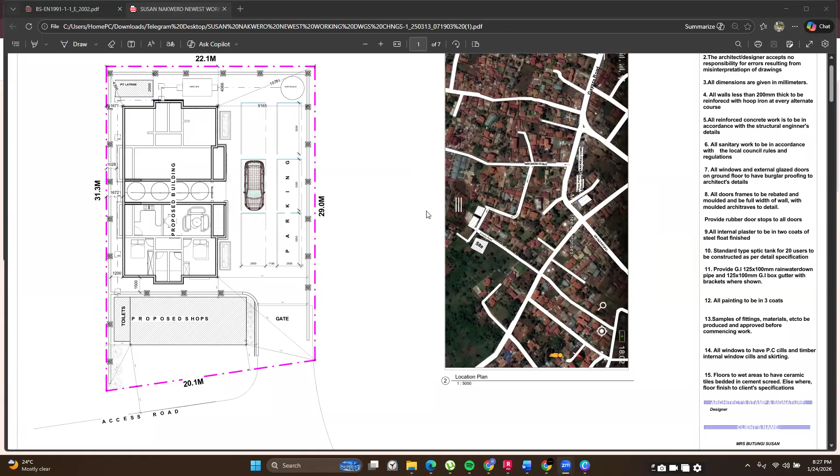I'll share my screen now. I hope I'm audible. Once my screen is visible, please type a one to let me know that I am audible and that you can see my presentation. I can see it is visible, and I hope I am also clearly audible. So this is what we have.

I'll start with what Boss Wataba raised. When you're modeling or placing your columns, you have to work with the entire architectural file hand in hand. The best way to do this is using CAD files, because you can overlay them in a software like Revit or AutoCAD. As you place your columns, you can tell whether they will collide with other architectural features or with the usage of the structure.

You want to avoid scenarios where a column goes through a room. Probably it's at a wall or beam intersection in the lower floors, but in the upper floors it passes through the center of a room. That's quite common, especially when working with maisonettes, which are fairly complicated. Normal residential buildings are usually simpler because their floor plans are typical and don't change much from floor to floor.

In the interest of time, I'll go directly into the software. We covered quite a bit yesterday, and we were able to model the first floor. We still need to model the staircase and then copy these elements to the other floors.

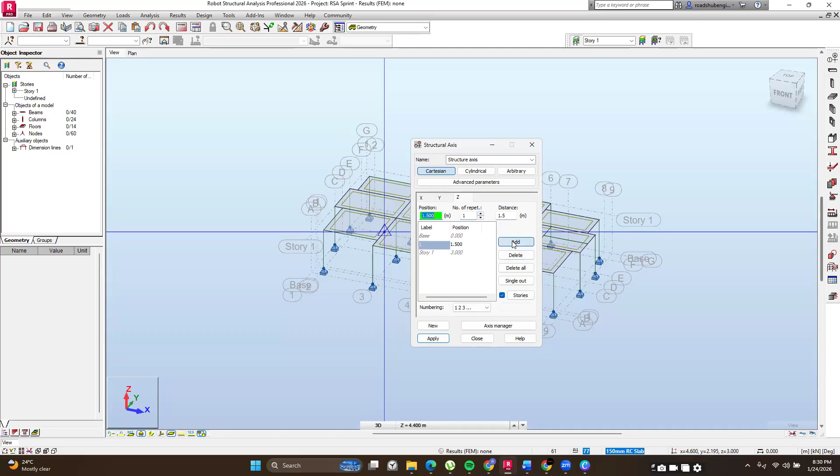At this point, you're going to add an intermediary story. We're going to have the position as 0, the number of repeats as 1. Since our story height is 3 meters, the position of our landing will be 1.5 meters, or just between the two floors. Then I'll click on add. Let me have number of repeats as 1, click on add, then apply. Once I do that, you're going to see that I have an intermediary story here.

So I want to place this staircase in this point here. I will use grid 1 to model my landing. Then I will add another grid in this direction between grid 4 and 5 so that I can have a separation for both of my runs - that is the run coming from the ground floor, and the run that is going to be moving from our landing to the second floor, or to the first floor.

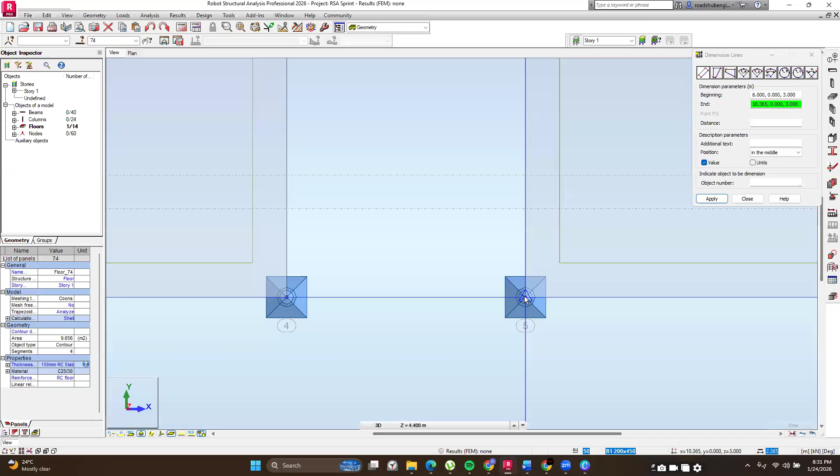So to do that, I will first measure this distance here so that I can see what you are working with. I'll go to tools. So to measure in Robot, this is what you do: you go to tools, then you click on dimension lines. Once you click on dimension lines, you just need to click between the 2 points that you want to measure and click outside.

So I have 2.365. Not sure what value I'll get once I divide this by 2. Let me do that quickly. 2.365 divided by 2 should equal something like almost 1.2 meters.

So I will just define a grid here. I will go to grid 4. And then since this is in the x-axis, I will click on grid 4 to make it my current position. So you click on it to make it the current position. Then once you click on it, you have the number of repeats as 1. And then I will enter the distance.

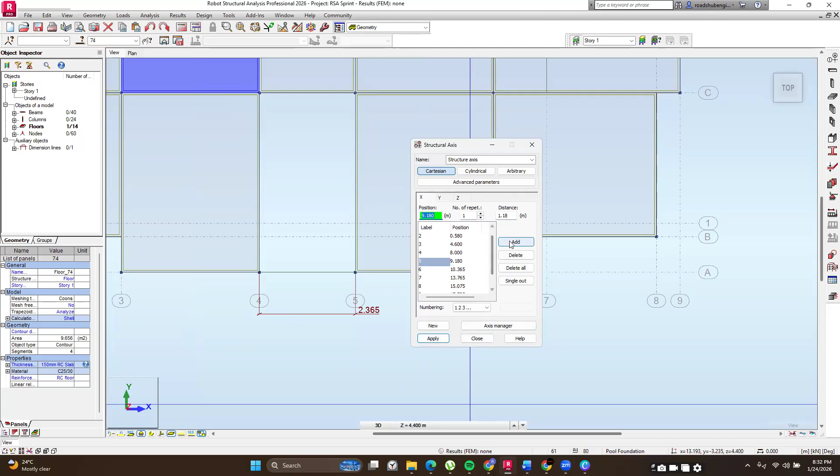1.18, that's what I got. Then once I have that, I'll just click on add. Okay, I'll click on add, then apply, and then close. Once I do that, you're going to notice that I have a new grid here. So by making this grid, it is going to make it easy for us to model our structure.

So we're going to get started with that. I'm just going to go to my plan view here. Then once I go to my plan view, I'm going to scroll down to my staircase level. Remember, my staircase level is 1.5 meters from story 1. So when I use this button here - this is the button we are using where you can see the XY, the story you're in, and then you have these 2 arrows here. The first arrow takes you to the upper floor, and the second arrow, pointing downwards, takes you to the lower floor.

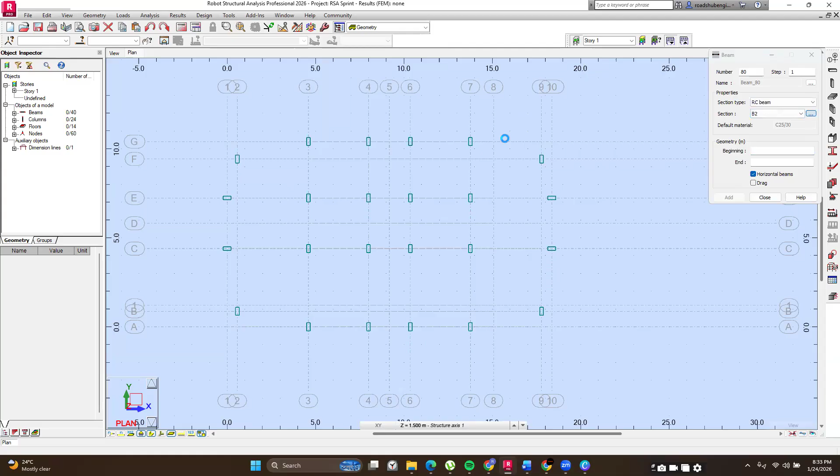So you'll just use the lower arrow to move to the lower floor, and then you are going to create a beam here. So I'm going to click on beam, and then I'm just going to define a new beam. I will define it as we did yesterday, and I will give this one a unique name, ST beam. The reason I'm doing this is so that I do not load it with my walling. The interest of having this beam is to just support our landing and not to support our walling. So I'll have it in such a manner so that when I come to load my structure, I do not need to load this one with the walls. I'll just have it here, then I'll click on add, then close. Then once I have that, I will place it between these 2 columns. That one is the beam that is going to be supporting our landing at this point.

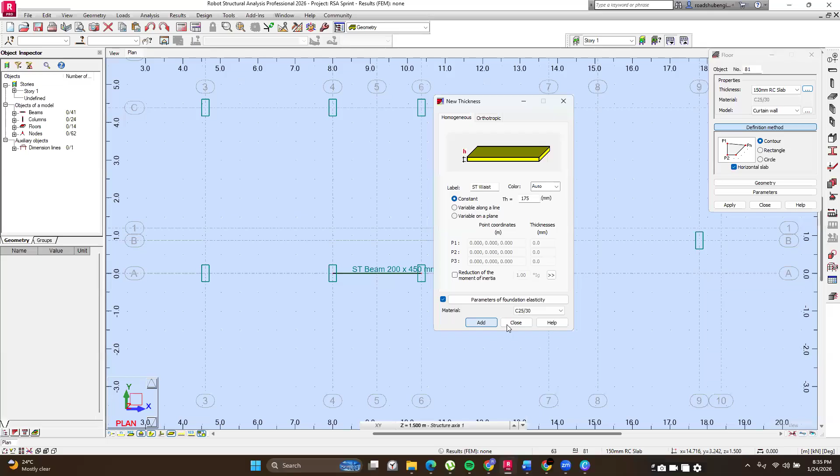Then after that, I will go to panels to define my floors. These are the risers, or just the flights for the staircase. So I'll go to floors here. Then once I come here, I will define a new thickness. I'll call it, say, the stair waist, just to be accurate. And then for the thickness, I will go with a thickness of 175 millimeters. The material I'm going to use, I'm going to stick with class C25/30. Then I'll click on add and close. Then to draw it, you just select rectangle and then you place it.

I hope you remember how you are placing them, staying consistent to the direction of modeling. You are working left to right, then bottom. You're going to see why we recommend you do that when we get to the analysis bit.

So this is going to be my landing. When you go to the 3D view, you can see where your landing is. So what we need to do now is model the risers.

Doing this is quite easy, and you can do it in any way you want. So I will start with the one coming from the first floor going to the landing, the one that is coming from the first floor going downwards.

So I'll just go to floors here. Then I will select my stair waist, ensure my model calculation method is shell. Then I will check rectangle. And because this slab is not horizontal, it is slanting in height.

Remember, it is moving from story 1 to the landing level, so I have to uncheck this horizontal slab. Once I do this, I will click here, then click on this other support. Then instead of clicking at this point, I will just click on the drop down here and click here.

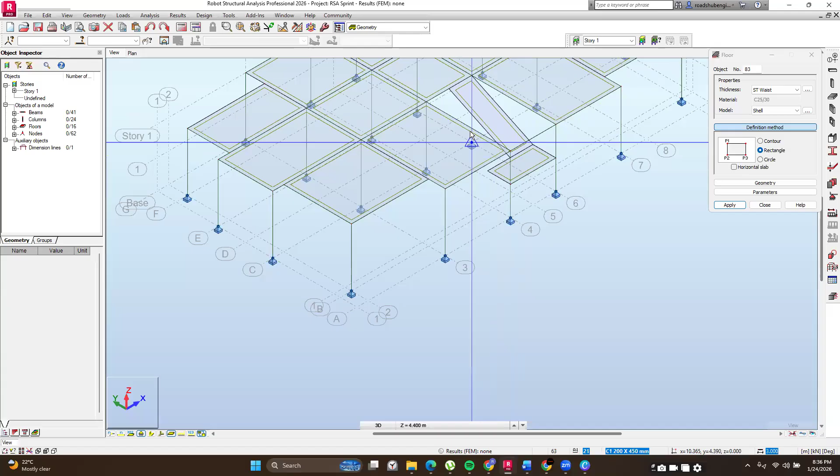Once you do that, if you go to your 3D view, you can see your first landing there. So it's that easy to model in Robot.

So I'll do the final one. I'll go to rectangle, have this one here, then move up to this level here and have my other landing there. So you can see I have my staircase ready.

Once you have your staircase ready, now you can begin to replicate this model upwards. Replicating this model upward is quite easy. We said we have 3 stories, so all we need to do is copy this story twice upwards.

Copying it is quite simple because all you have to do is go to the object inspector on the left. So to copy this structure upwards, you go to the object inspector on the left, and you're going to right click on the story parameter there.

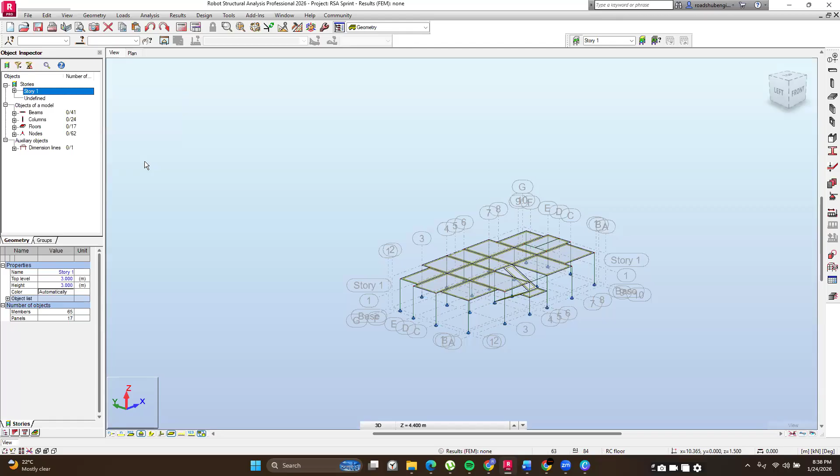I hope you can follow my cursor. I'm moving with my cursor to the left, and just here under Object Inspector, we have stories. Then I'm going to right click on story, and once I right click on story, I'm going to copy story. So you just right click on story, place your cursor on stories, then go to copy story. Once you click on copy story, this pop-up is going to appear.

What this pop-up is prompting you to do is just define the settings by which you want to copy your structure or elements. So I want to copy them going upwards, so I will ensure geometry is at the top.

Then the floor height is 3 meters, and then I will define the number. So I want 2 copies. I'll just click on 2, and then I will click on OK.

So when it comes to creating these copies, if they are just a small number, say 2 or 3, you can do it all together as I have done. But if you are working on a larger story, say you want to create 5 copies, I'd recommend you do them 1 by 1 or in sets of 2, so that you do not overwhelm your software.

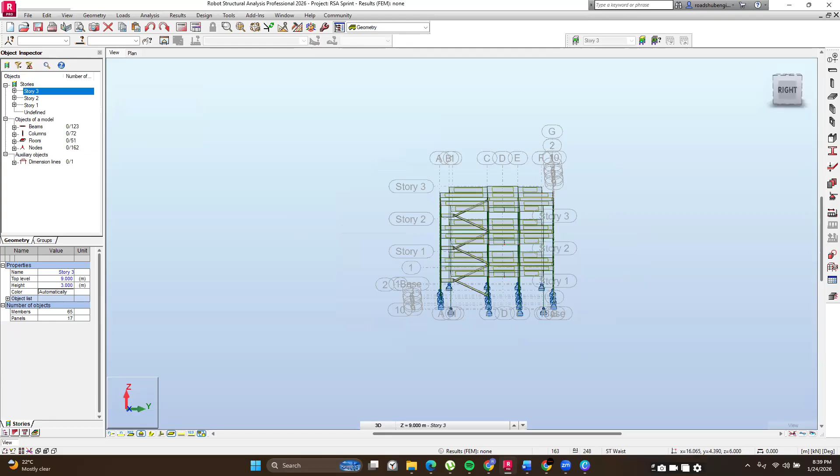Then I will uncheck this filter story axis so that you can see our structure. All right, and that is what we have. That's how you can visualize your structure within Robot, and you can see modeling it was quite easy.

If you remember the design process we had yesterday, we stated that after you've done your conceptual design, or come up with a preliminary sizing of the members, this is where we are at. We have made educated guesses on the positioning of columns, their orientation, and their sizes. So in the next stage, we need to load the structure, load the elements.

And then after we load the elements, we are going to do our manual combinations, and then we are going to run an analysis. After running the analysis, we will be able to understand how these loads are going to affect our structure in real life. What are the shear forces that are going to arise due to our loading?

What are the bending moments? What are the axial loads? Once we have those results from the analysis, we are going to be able to design the structure or the elements in a more detailed manner and get the required cross-sectional areas and also quantities of reinforcement.

So at this point, we want to load our structure. When it comes to loading the structure, we have the typical loads that you expect your structure to be exposed to, depending on where it is. The most common ones are the dead loads, live loads, construction loads, wind loads, earthquake loads, snow loads, and soil loads. Loads are hugely affected by where your structure is located.

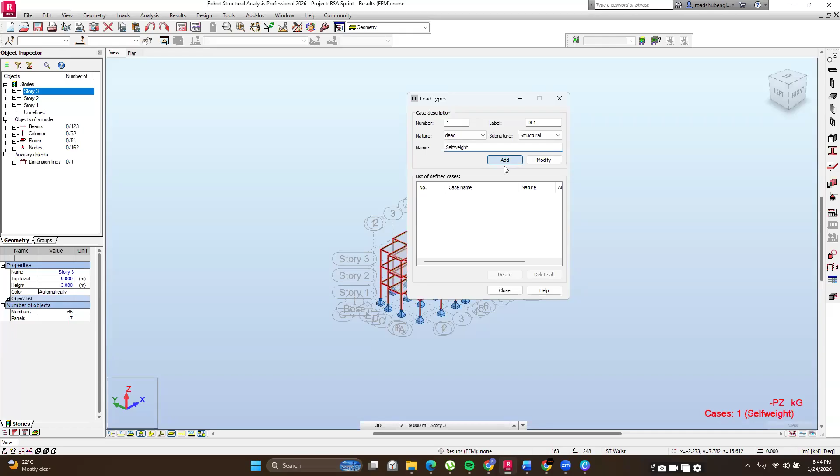So it's just good practice to assign this as the self-weight, and then click on Add. You can see once I did that, my structure became highlighted in red, just to show you that the self-weights of these elements have been accounted for. Then you're going to have loads that you expect our structure to be exposed to. So we have the wall loads — these are just dead loads that are going to be arising from the weight of the walls.

Then we have floor finishes. And then I think from there I could move to live loads. So I'll change this to live, and then I will just have two live loads: floor live loads and stair live loads. Just that. Then once I add them, I'll click on close.

So at this point, we've told the software the type of loads that we expect. The next thing we need to do is to tell the software what are their magnitudes, what is the nature of the force, or how large or small is the force coming from these loads.

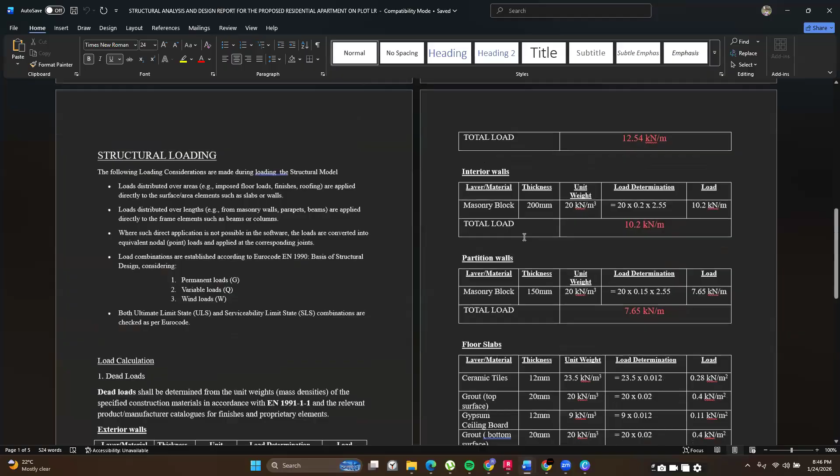So when it comes to loading the structure, I always recommend you decompose the loads manually so that you can be able to understand the loads better. The beauty of doing this manually is you can create a template like the one we have, a template for your loads so that you can keep reusing them. You do not need to keep calculating them every time you have a new structure, especially if they fall under the same category.

So for the dead loads, I prefer if you decompose them manually, and then for the live loads, we are always going to refer to the Eurocode, Eurocode 1, for the live loads. All right, so let's get started. I'll just make this quick so that you can save on time.

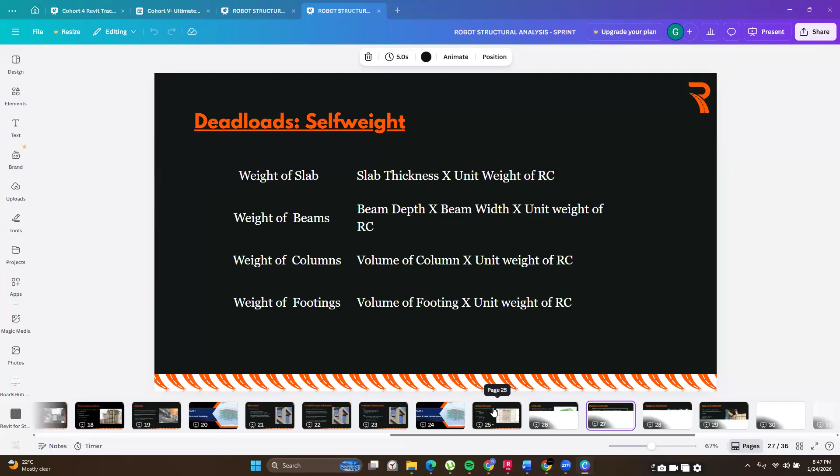Okay, so we have basic dead loads here, and this is just a way of calculating some of the loads that you expect to have. So for example, for the wall loads, you could easily calculate them by multiplying the unit weight of the material, that is the density of the material, say of the blocks or clay pots you're using as your walling material, then multiplying it by the wall thickness and the wall height. If you do that, you get a load in kilonewtons per meter. Remember, the wall loads are going to be acting on the beam, or they are majorly going to be acting on the beam, so we expect them to be in kilonewtons per meter.

So let's define this one. To define it in the software, you do this. The first thing you have to do is change the case here. I hope you can see where I'm moving with my cursor. Click on this dropdown and change the case here to wall loads. Then once you change the case to wall loads, you just go to loads and then load definition. Then once you are at load definition, now you define the load. These are the types of load definitions we can do: we can do nodes, we can do members, and we can do surfaces.

Nodes are basically point loads, members are majorly line loads, and surfaces are loads acting on your panels or slabs, which are usually area loads. Since the wall load is a line load acting on our beams, we are going to select uniform load here. So you have various types of loads you can add on your beams: uniform loads, uniformly varying loads, uniform moments, points and moments at given points. To keep this simple, we are going to go with the uniform load.

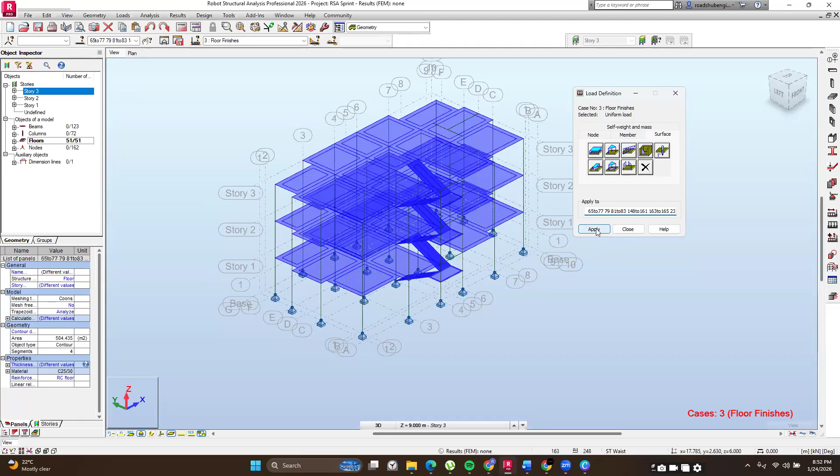So for this, I'll go with negative 1.75 and then click on add. Then I will select my floors — just right click here on the floors, select all of them, then copy and paste them here. Once you do that, click on apply and close. Then you have those loads added.

So you have all the dead loads added: your self weight, your wall loads, and your floor finishes. With that, we have all the dead loads that we expect our structure to be exposed to.

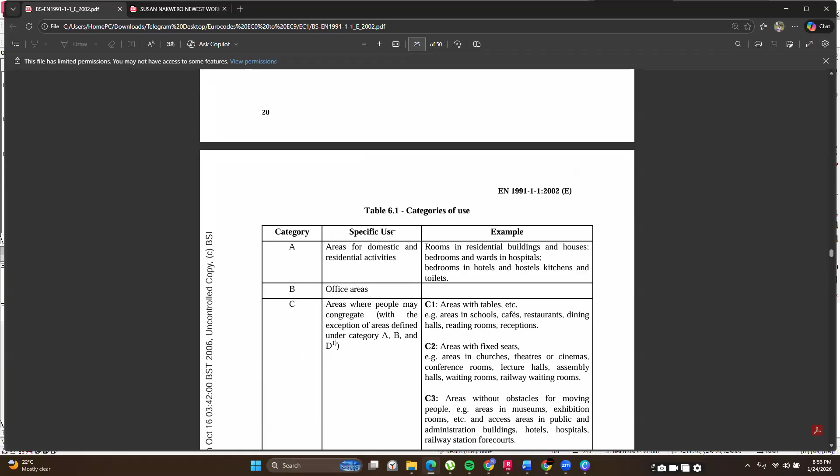The next thing I would want to define are the live loads. Values for the live loads we majorly obtain from Eurocode 1991 Part 1. For you to read these loads, you need first to go through table 6.1 so that you can understand the category under which your structure is. You can see they are categorized from category A to category D: areas for domestic activities, office areas, areas where people may congregate, and shopping areas. Depending on the type or use of the structure, you are going to have varying loads — the more people you expect your structure to serve, the more loads you have to account for.

Ours is a residential house building, so we expect it to be under category A. For category A, for the floors, we expect loads of 1.5 to 2 kilonewtons per meter squared. For the staircase, we have 2 to 4 kilonewtons per meter squared, and for the balconies, 2.5 to 4 kilonewtons per meter squared. So we are going to load these differently — we're going to do our floors first, then our stairs.

So we are going to go into Robot, and once we go in, we are going to select our floors and leave out the staircase. To do that, you have to go into the object, to the member selection here. Just follow my cursor — I'm hovering it around or over my structure, then moving it to the member selection over here. You left click on member selection, and once you do this, you're going to have these tools to select specific members.

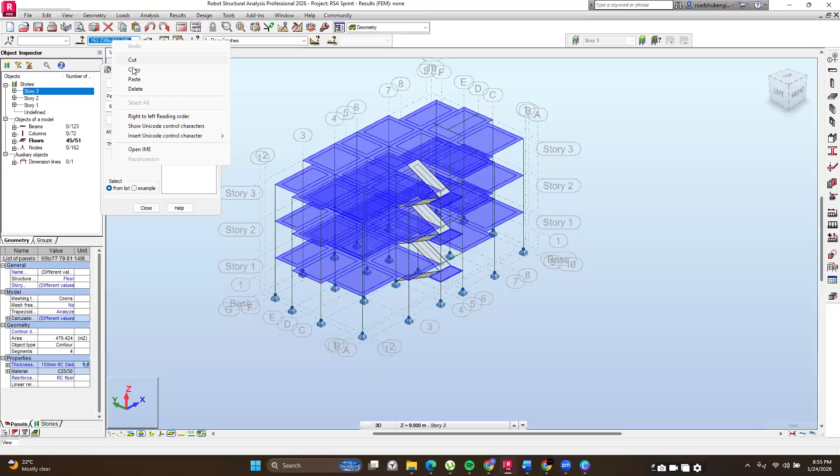I'll then copy these numbers. Then I will change my case to floor live loads, go to loads, then load definition. Since this is a surface load, I'll click on surface, then select surface load. We saw the area load for floors should range between 2 kilonewtons to, once again, 1.5 to 2. So there's no harm in going with a negative 1.75 for that. I'll click on add, then apply, and I will have my floor live loads added.

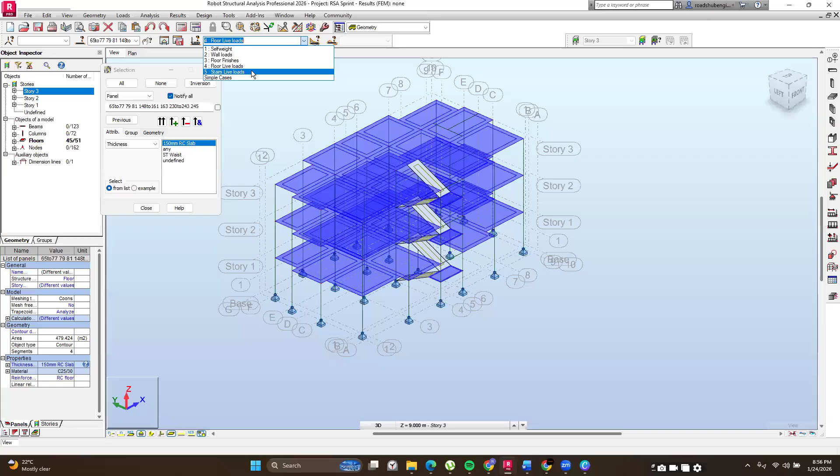Then I'll click on none here so that I unselect those floors. Once I have that, I'll close this and then change the case to stairs live loads.

After I change the loads to stairs live loads, I'll go to loads, then load definition. Once I'm here, I'll go to surface and select the surface. By looking at the code, you can see the imposed loads for staircase should be around 2 to 4 kilonewtons, so I'm just going to go with 2.5.

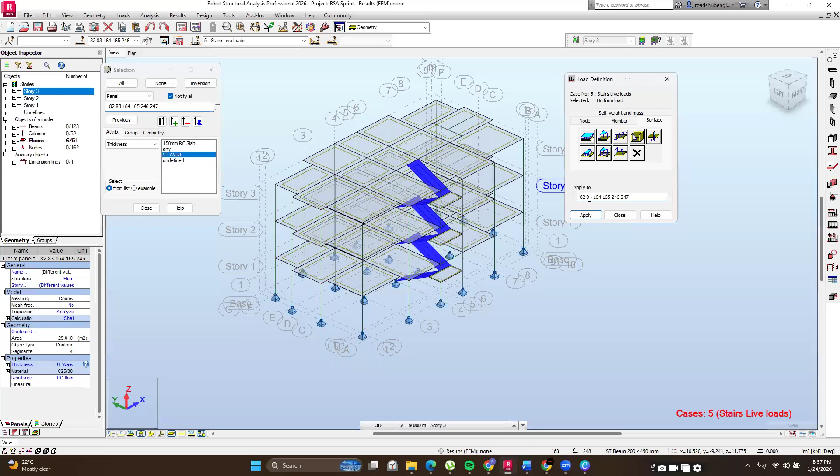I'll go with negative 2.5, and then click on add. I'll click on add, and then once I come here, I'll just delete these. Then I will select my staircase here, I'll just select my stair waist. Once I select them, I will paste it. Once you do that, you click on apply and close. By doing that, you can see that you have easily just applied loads to your staircase.

Then after you've applied loads to your staircase, you need to create the combinations. Remember what I told you about Robot? It is organized in a very beautiful way, because it literally guides you on what you want to do. So you finished your geometry, then you've done your loads. The software is telling you that you need to do your load types first, then your load definitions, and then you can do your combinations.

You can do your combinations in one of two ways, either manual or automatic. With manual combinations, you get to tell the software how you want your loads to be combined. With automatic combinations, you just let the software combine them for you. I always recommend you go with manual combination so that you can be in control. Once you click on manual combination, you get this prompt, which allows you to select the type of combination that you want or need.

You have ULS and SLS majorly, so I'm going to be doing the ultimate limit state combination and the serviceability limit state combination for today. For the ULS, I'm just going to give it a name, ULS combination, and click OK. Then I just need to select all my loads and move them to this side. You click on these three dots, on this arrow, move them to the right, and the software is going to assign the correct factor.

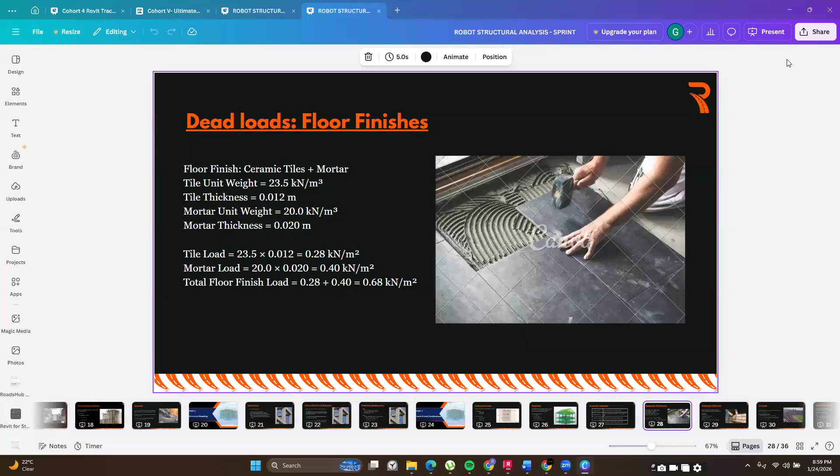Remember what we said yesterday: when it comes to loading your structure, you expect some uncertainties in the design. Sometimes you have to account for scenarios where certain loads are going to be exceeded from time to time. There are times the live loads may exceed what you actually designed for, or the masonry blocks used to construct your wall may be heavier than you intended them to be. For that particular case, you have to multiply them with a factor of safety so that you can account for those deviations.

This factor of safety is provided in the code. If you are familiar with the Euro code, you know the factor 1.35 for the dead loads or permanent characteristic loads, and then 1.5 for the QK or live loads. So we have that, and you can see that the factors are applied automatically depending on the type of combination you selected.

So I'll click on Apply to apply that. Then we are going to click on New to create a new combination. This time you are interested in creating an SLS, or serviceability limit state, combination. I'll select SLS, and in the combination name, for ease of reference, I'll call it SLS combination. Then I'll click on OK.

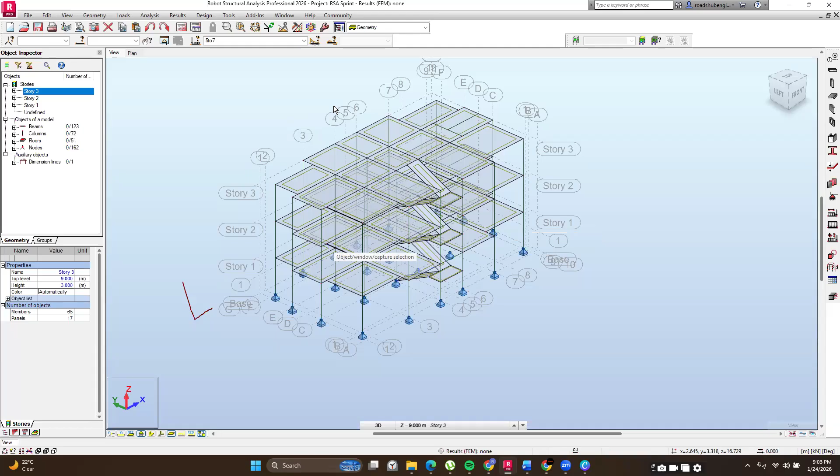So to ensure you get the design right with Robot, you have to mesh correctly. The first step, this is what we do: go to Tools, then Job Preferences. This is the first step I will always recommend. Go to Tools first, then Job Preferences, click on Meshing, and where you have Panels, change this to User. The reason I'm changing it to User is so I can have more control over the software. I do not want it controlling my machine or controlling everything in the background. I want to define my own parameters, so I'll always go with User.

Once you go with User, click on these 3 dots, have them as complex mesh generation, then go to method parameters and uncheck regular mesh. These are just some of the tips you use when working with Robot, just to be in more control of how the software designs. Once you have this, just click OK and OK, and that is the first step.

Then the second step is in setting the mesh to happen, or to occur. To create the mesh, or to break down our structure into mesh elements, this is what we do: we go to this option here, called the options of finite mesh generation.

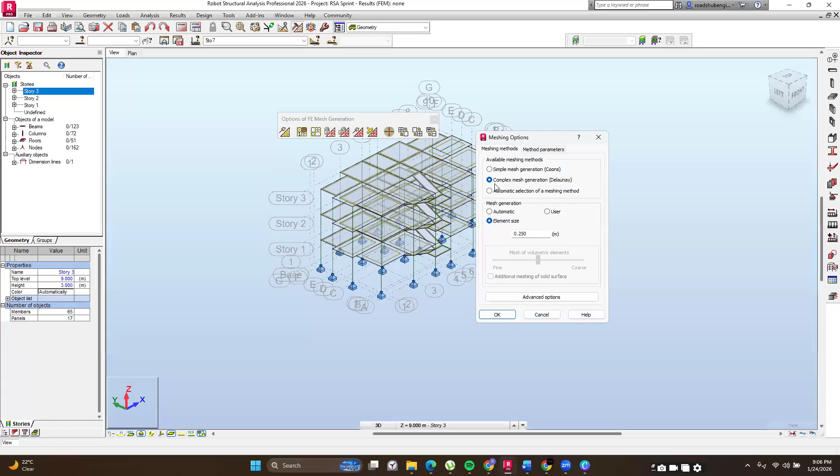Once you have them as shell, go to options of finite mesh generation again, then go to meshing options and apply this for all elements. Once you do this, set it correctly. We had done this before in the tools, so I'm just confirming everything is as I had set it. Once we're good, click OK, and we're good to go.

Once you have that, now you can generate the calculation model so that we can do our analysis. You want to do your generation, just ensure everything is okay. Once you do that, you'll notice the software breaks down everything into small elements. You can see our slab has been broken down.

If you can see how our slab has been broken down, please type a 1. Super, I can see we are together, so we are going to proceed.

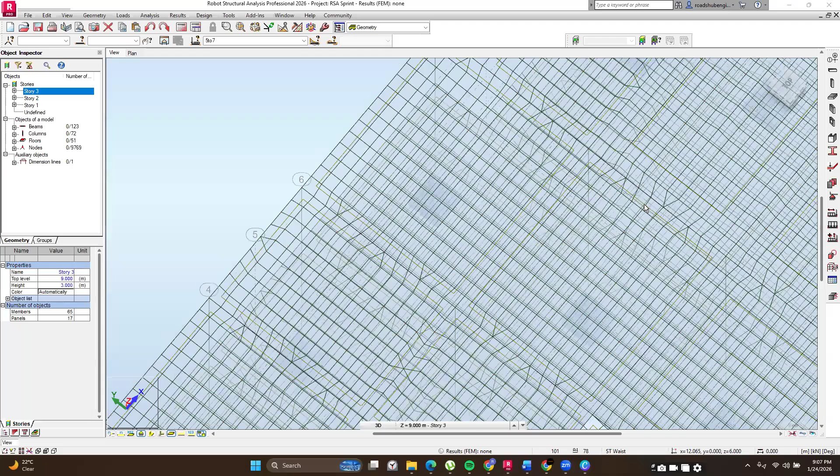Once you have this calculation model, now you can do your analysis, and analysis is quite easy, especially for smaller structures. To run this is simple: you just click on calculations here, and let the calculations run. Once the calculations have run, you'll notice that the results are now available.

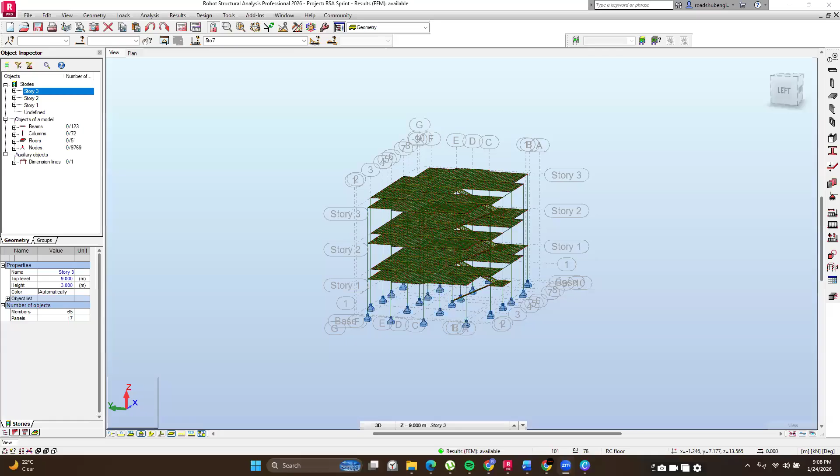Previously the results were not available, but at this point they are available now. So it means we can now understand how the various loads we applied earlier are affecting our structure. We can see the bending moments, the shear force, the axial loads, and everything else, and read them from here. I want us to get to understand the type of forces that have arisen due to the loadings we applied.

But before we do that, let me open something here. I think this one is important to have. Let me see, we'll expand this slowly. Okay, so I have that. Let me take you through how you read the results.

When it comes to reading results in Robot, it's quite easy. We have tools in the software that allow us to read the results, located in the results tab, and you can see we have many options. As I proceed, I hope you're appreciating how the software has been organized—it's really easy to follow. You have your geometry, then your loads, your analysis, then your results, then your design. It's arranged to lead you on.

So we have our results. For you to view your results, you have various options: diagram for members, maps on members, maps, and panel cuts, plus other options as tables. For today, we're going to focus on diagram for members and also maps. We'll use diagram for members for our framing system, that is our beams and columns, and we'll use the maps for our slab.

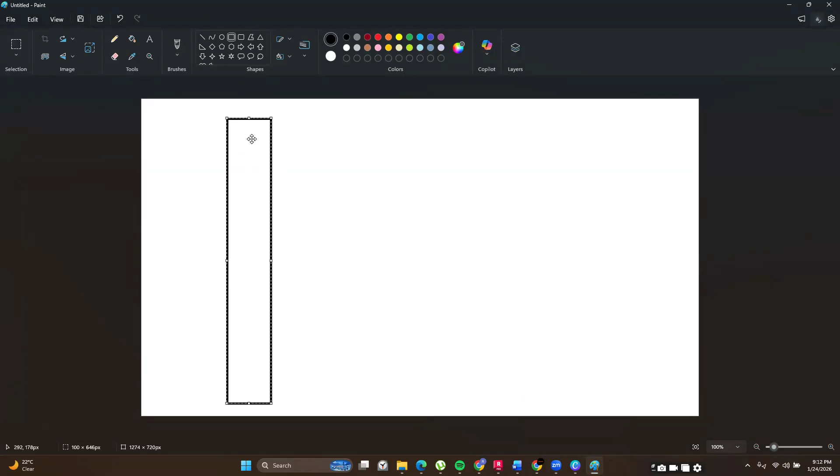Okay, so this is how Robot works. If you are looking at a member, be it a column—let's assume this is a column, or this is the longer section of a beam—this axis that is cutting through this longitudinal section is the x-axis.

This is the local axis for the members. If this is the local axis, it means that if a force is acting in this direction, then it's an axial load. Then we have the cross section right here. Let's assume this is the longitudinal section, and this is a cross section.

So you have these axes. We said for these members, you have the major axis going in this direction, and the minor axis going in this direction. This axis in Robot, the major axis or the axis along the deeper section, is always Z. This is the local axis system for Robot. So you have this axis as Z, and this axis as Y.

Once you understand that, it becomes easier to understand these results. If you do not understand this, you may not be able to understand what the software is communicating with you. So just to reiterate, this is the x-axis, this is the z, and this is the y.

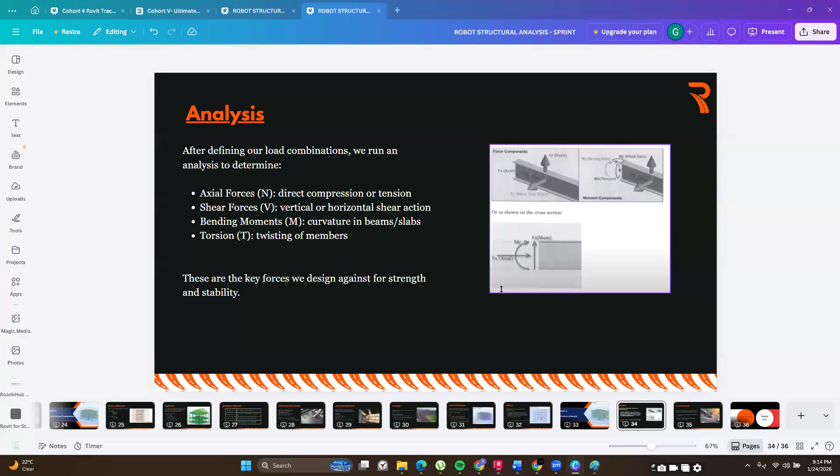From this, you can tell if this is the beam, the Fz is going to be your shear forces, and that is what you look at when designing for stirrups or placing your stirrups. And if the forces are in this direction, then you expect them to cause a bit of torsion on your member. That's mentioned, or provided, on some of the Autodesk forums.

That's what I always recommend when you're using a software—just make it a habit. Go through their forums, get to understand what they are saying over there. You get to learn a lot on how to use the software.

So you can see the Fx is the axial force, the Fz is the shear, and the Fy is the shear in the weaker axis. You can also see it in this diagram here.

Now that we understand that, we can portray and show some of the results. I'll start with the FX, which is particularly important when designing your columns, because for columns you're going to be designing for the axial loads and the moments. So I'm going to show my FX here.

Once I show my FX, I'm going to go to my parameters. Parameters, we said, affect how the results are viewed. So I want to show labels so that they are a bit clear, and I want to show the positive and negative values as differentiated, and have my graphs filled. So once I click on apply, you can see what happens.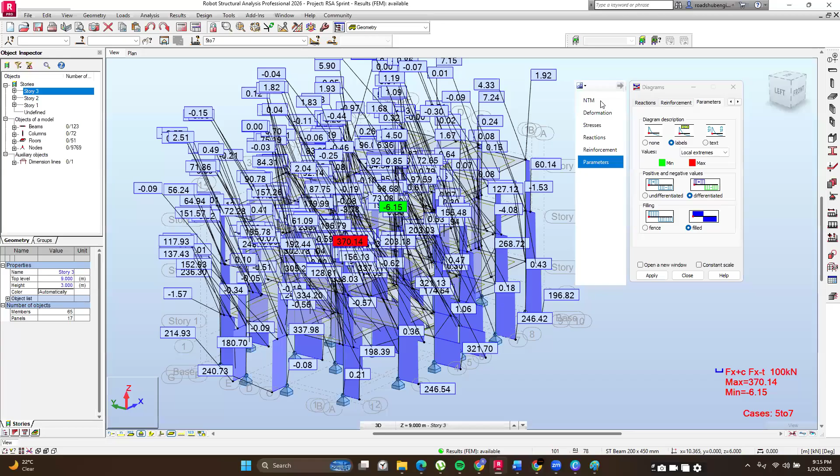So when you have this, it becomes a bit difficult to read, right? It is a bit difficult to understand what is going on in the background.

So to make this process a bit decluttered and easier to read and digest, I always recommend you filter them out.

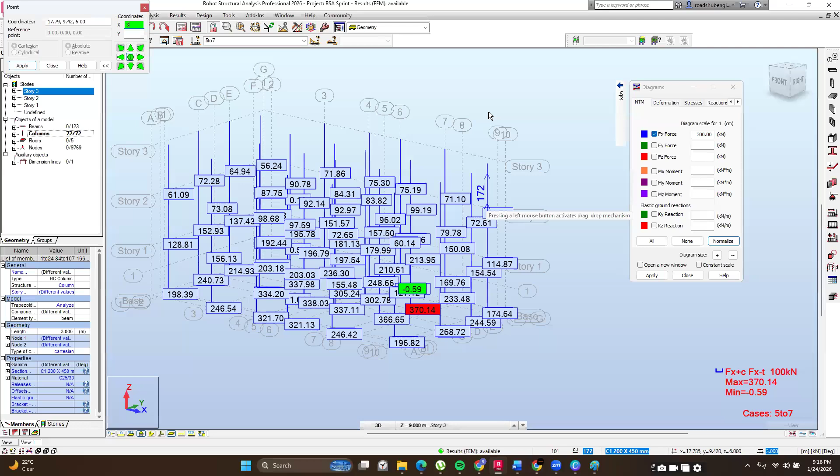If you want to analyze your columns or just understand how they are behaving, go to the object inspector, right click to select all your columns. Once all your columns are selected, click on Edit in New Window. Once you click on this, you're going to see your columns only. To make this a bit smaller or more detailed, just zoom in and click on Normalize, and then you can make more sense of them.

So you have that. You can see in this view they are a bit decluttered. So what you want to look at this point is how these forces are behaving.

So we said Fx is the axial force. And when you're looking at a column, you expect that the axial force or the load it is carrying to cumulatively increase as it goes downwards. So you expect every column to have the minimum loads at the top, and the maximum axial forces at the bottom. And these forces at the bottom are the ones you're going to use to design your foundations.

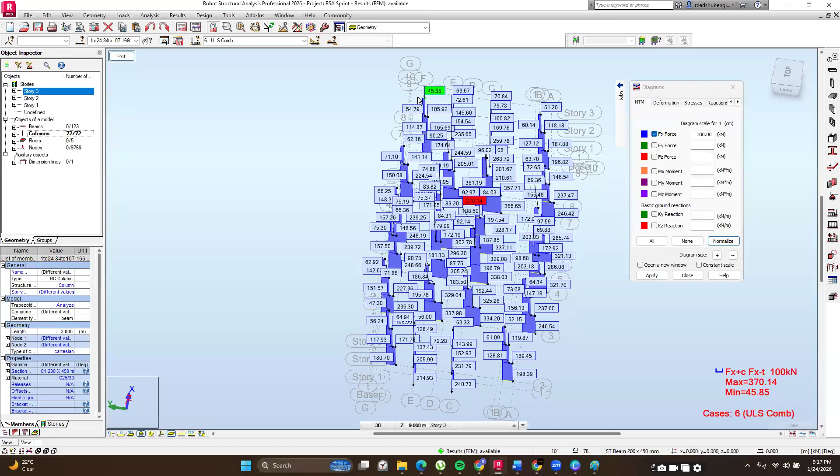I'll just turn this to the ULS combination so you can see this. You can see that the maximum load we have is 370 kilonewtons on the axial loads. To know your maximum load, it's always highlighted in red. So this is the maximum load our columns are facing. And then the minimum one, or the smallest, is the 45.85 you can see here.

You can use this to understand and judge if your modeling is correct. So if you look at this, you find that for this column, the axial load at the bottom is smaller than the one at this second story level. Then you need to ask yourself, what is happening? Why is that happening? Because it does not make sense. That should not be the case.

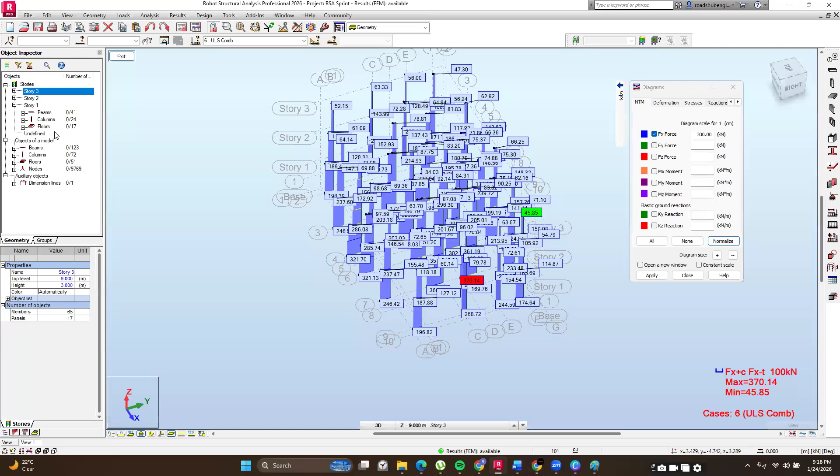And the beauty of this is you can filter out as many elements as you want. Say you're just interested in the ground floor columns, since you know the most critical columns are in the ground floor. So if you want to look at them, expand your story one, then select the columns in story one alone, and click on Edit in New Window to view those parameters.

And then you can zoom in and click on Normalize to make them a bit smaller, or you can just click Shift and Page Down on your keyboard to make them easier to read. And you'll be able to view your results better, so you can judge them on your own.

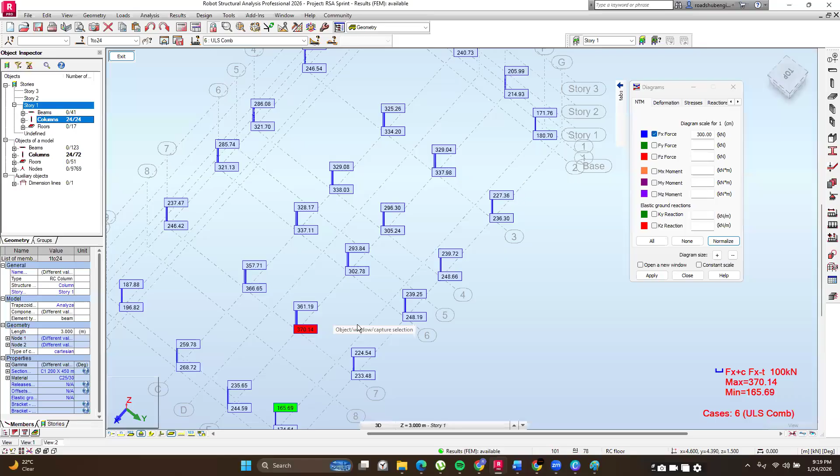Something you're going to notice is that the interior columns usually experience more axial loads than the ones on the outer sides. You can see the ones on the edges of the structure have axial loads in the ranges of 250 going downwards, while all the ones on the inner part of the structure are above 300 kilonewtons, which is something you'd expect.

Then you may want to look at the moments, MY and MZ, and you'll realize that most of the outer columns experience more bending compared to the columns within the structure. The reason is simple: they support beams on one end and not on the other end. If you remember the Hardy Cross method of distributing moments, you have a few elements you're distributing moments for, and in a realistic way there's no element on the left side trying to counter out the moments. So this is something you would want to look out for.

So you'd expect the columns on the outer edges to experience more bending compared to the moment of the columns on the inside part of the structure. And then you need to understand what these forces are.

So we said Fx is the axial load, and then Fy and Fz are shears. One is more along the major axis, and then Fz is along the other axis. And then Mx is the torsional moment.

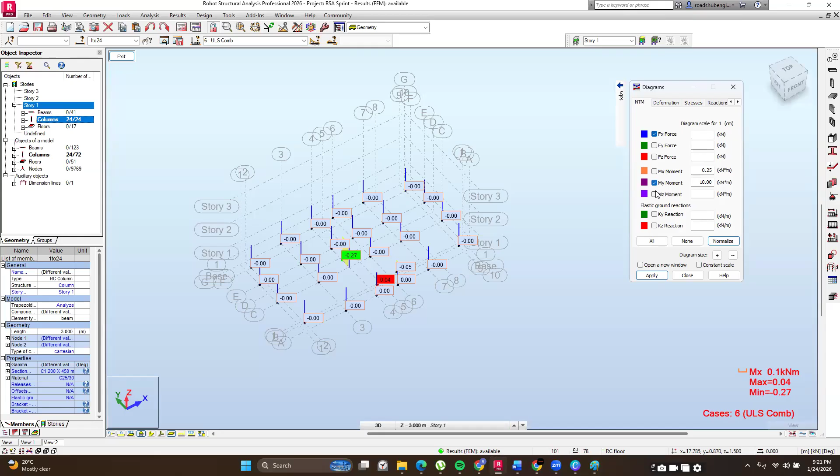Mx is the torsional moment. So if you have this axis here and your structure is being rotated along this axis, then that is torsion because it is causing some twisting to your element. And then you have My and Mz, which are bending along the major axis and the minor axis.

So this is how you can easily view and understand your results, just to get a good understanding of this. All right, so I'll show you something else.

You may want to see the shear forces on the beams. To do that, it's quite simple. I hope you can follow my cursor - look at where I'm hovering. Let me see if you're still following. I kind of lost my zoom thingy here.

Okay, so we have this structure here. Follow where I'm hovering with my cursor. At the bottom, we have this 3D option, and it is affecting this view - it is showing us a 3D view of our structure.

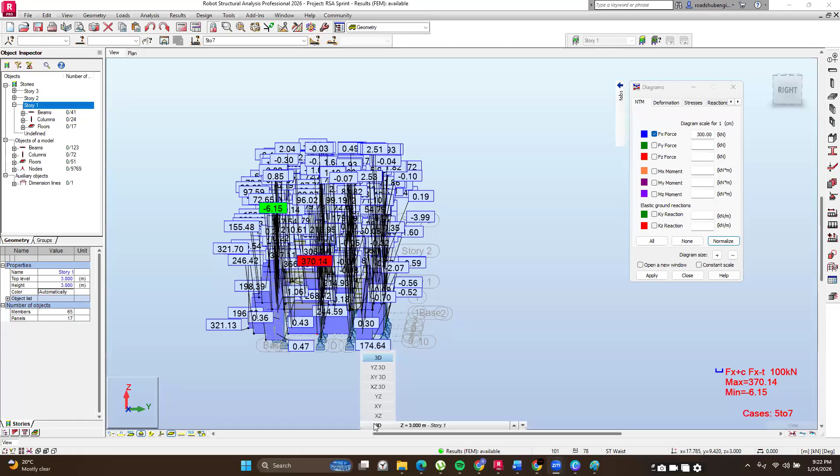So if you wanted to see the frames, you can work with XZ and YZ. For example, if I went with YZ, you can be able to see how the moments are distributed within the beams and the columns.

So let me turn this to FZ so that you can make more sense of it. So these are your beams and these are your columns.

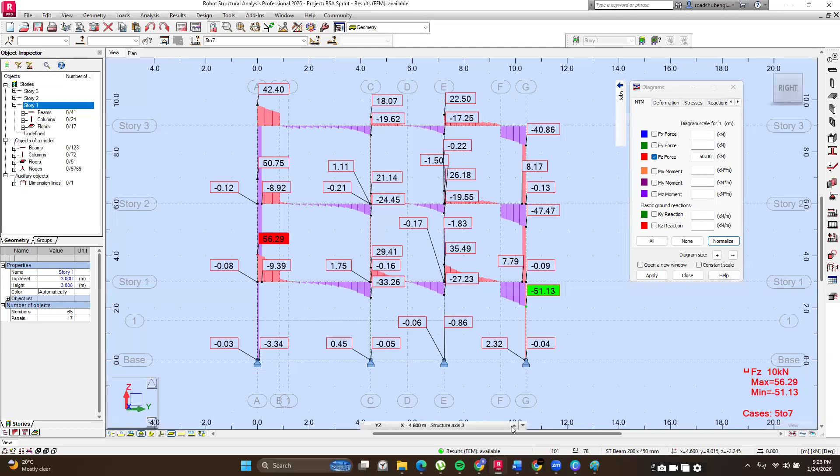For the shear forces, you expect your shear force to be maximum near the supports, and almost zero towards the midpoint of your structure or of your members, and that is basically what you are seeing here. So that's how easy it is to view results for members and just make sense of them. I always advise you go through them, ensure they are behaving in a manner that you expect.

All right, and that's how easy it is to do. Then the other thing I would want to show you is the other method of viewing the results, and this one is basically for the floors.

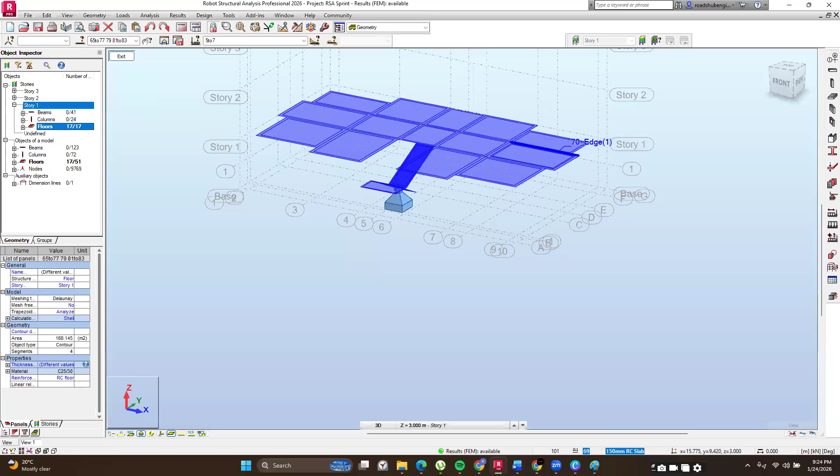So you may want to see how the forces, the bending moments, are carrying or distributed along your floor. To do that, you need to go to results, and then select maps. Once you select maps, it looks quite the same to what we had earlier, so you just need to select what you want to see.

So I'll bring you back to something I explained yesterday, what I was advocating for. During modeling, I was advocating that you stay consistent with the direction along which you model your slabs. If you choose to go from left to right, stick with that, because the direction you start modeling with becomes your x-axis, and then the second one becomes your y-axis. So if you start from left to right, this becomes x and then this becomes y.

So it is always better if you stay consistent, because all your panels will have the local axis in the same direction. It becomes a bit hectic when you have this x-axis in this direction, and then when you came to this panel, your x-axis is in...

Do I know how to use this?

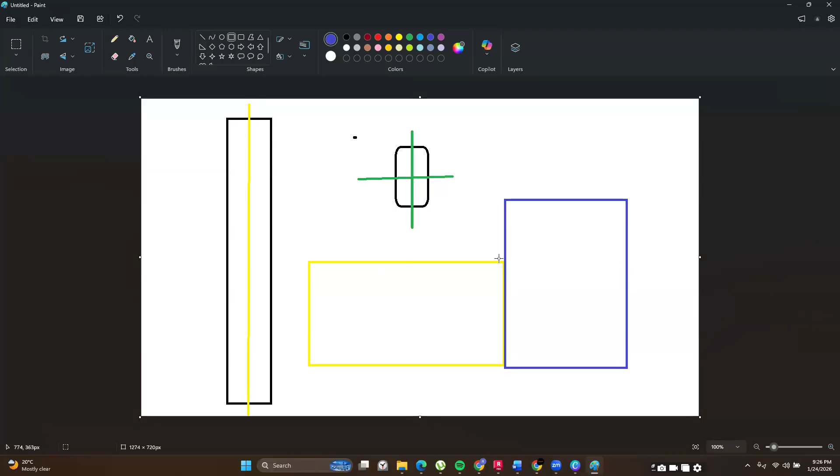So it becomes a bit hectic to read the results if the moments along X for this panel are left to right, and then the moments for this one, the X-axis, are in this direction. It becomes a bit hectic to read. So the axis definition, or the local axis for the panels in Robot, the first direction you model is your X-axis, and then the second one is your Y-axis.

All right, so with that, I think we can now just view the results. I'll change this to the ULS combination, and then I will start with the XX so that you can just visualize what we have.

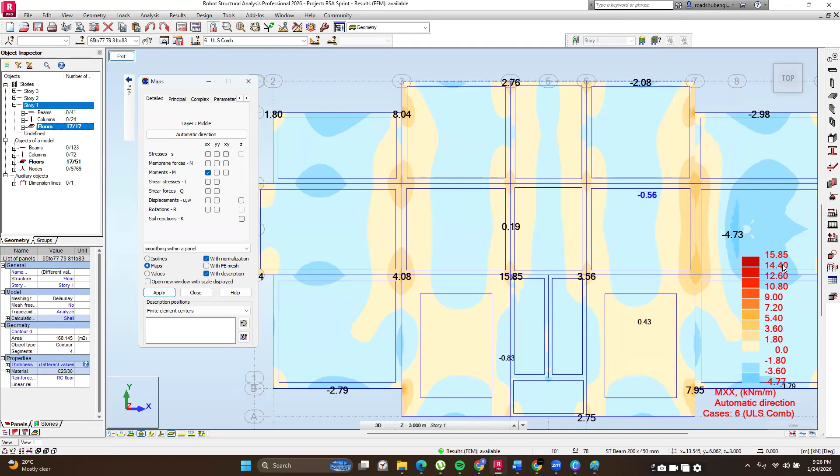And basically this is what we have. You can see the moments along the X direction. You can see the moments are quite small. And here you have, say, a map or a key. So the moments here are quite small. Our slab panels are not that large, so we are lucky enough.

You're going to notice that your bending moments here are going downwards, so they are negative. Near the supports, you're going to have positive moments because they are acting upwards at that point, or some hogging moments at these supports, and that is something you expect. You expect maximum deflection near the centers, and then almost zero deflections near the supports. That's basically how you read your results.

In the interest of time, I'd like to move to design so that we can have a good grasp of design, and then at least we can proceed from there next time. So we're going to design at least one member for each element: one slab, one beam, one column, and one foundation. Okay, let's do that.

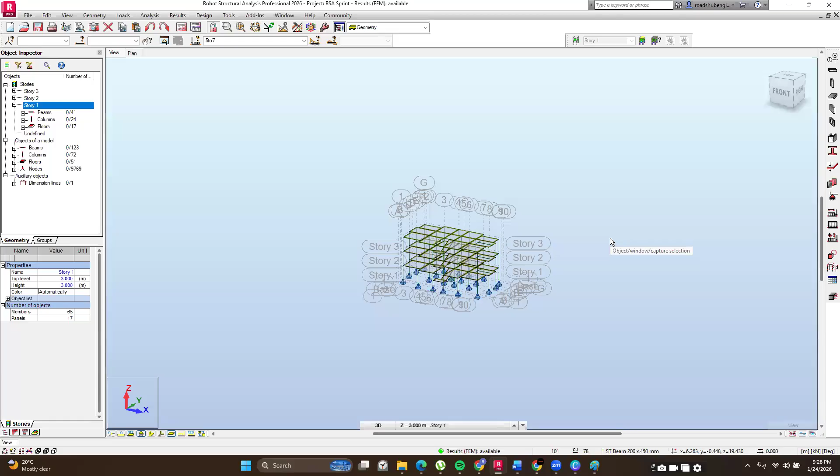Doing this is quite easy. At this point, a majority of the input is by the software, so when you ensure you've modeled correctly, this step becomes easy. All you need to do is select, say, the floors you want to design. I'll do them for one panel.

For these floors on the ground floor only, I'll select them from here. I will go to panel, select the 150 millimeter slab, then filter out the others so that I can only remain with one floor. And that's what you're going to use for design.

So to design these elements, it's quite easy. All you need to do is go to design, then go with provided reinforcement for RC elements. You can see how working with Robot is easy - all you need to do is select the members you want to design.

I'll go to panel, select my 150 millimeter RC floors. I don't want to design for the entire structure - for the interest of time, I only want to design for the first floor only. So I will filter out the floors that I do not want to design for, copy this list, and then go to design provided reinforcement for RC elements.

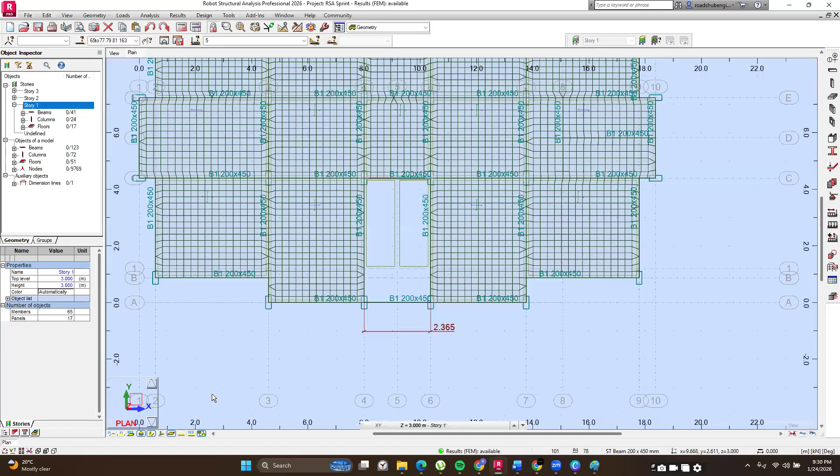Once you've brought your elements here, you're going to see your elements right here. I only have one slab here, let me go back and select correctly. I will do this in the plan view. Select these panels here so that I can design provided reinforcement of RC elements.

Now I have the entire design here that I want to design for. Once I have these elements, the first thing is to set the parameters that guide your design. Robot is powerful in this way - it gives you a lot of power. You have to set everything and remain in control of everything.

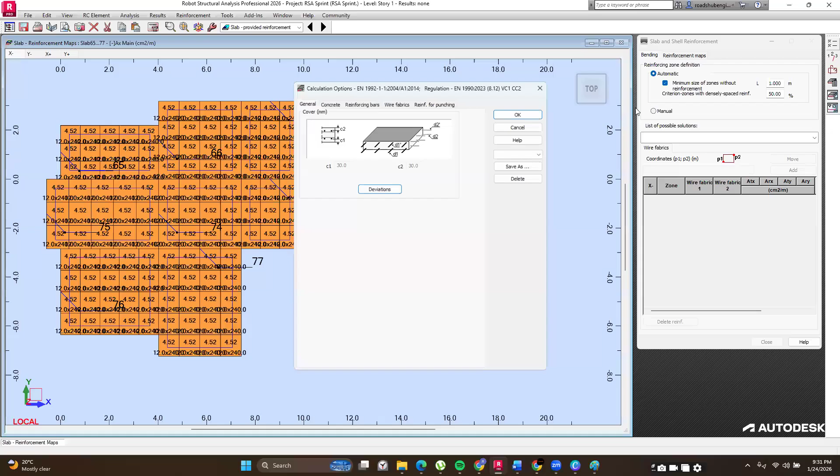I'll start with the calculations options over here, and keep it simple at this point just to take you through, and we're going to build on it slowly. So we have general, then concrete - you can see the concrete used in the calculation. We have class 25/30, and that is what we intended to use.

Under reinforcement, we have to select the types of reinforcement we need. For the design of slabs, we majorly use 8 millimeter, 10 millimeter, and 12 millimeter bars, ranging between 8 to 12. As for wire fabrics, I would not need wire fabrics for this slab at this point, and because it's not a flat slab, we do not need reinforcement for punching.

So I will save these as calculation options for slabs. I could call it calculation options for slabs, and just have it there. So what I'm doing is creating settings for the software so that we can use it for design as we intend to. I'll just click on OK and OK.

Then the second one is the story parameters, and this one mainly constrains the exposure class, or it is determined by the exposure class of the structure. Our structure falls under class XC1, and at this point we do not need to make any changes to this. So I'll just click on OK.

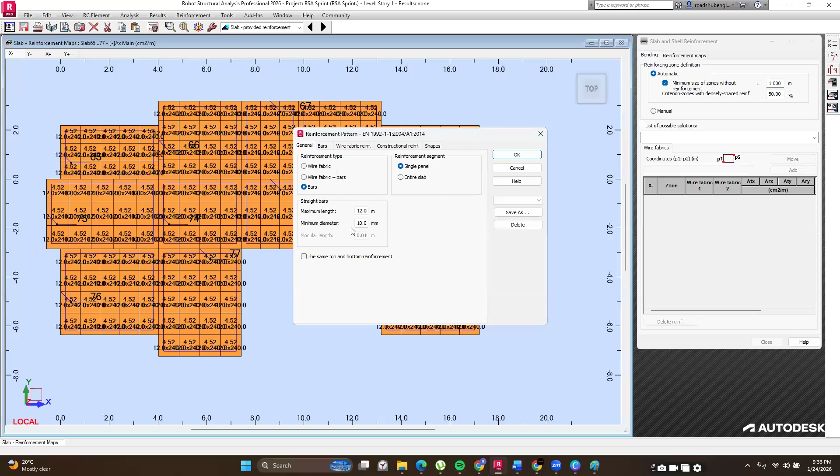Then the next one is the reinforcement pattern. This one is important for slabs. You have to ensure that under general, you have bars. Then the maximum length of bars - ensure you use what is available on your site. And then the minimum diameter, also work with what is available on your site. Once you have that, that's all you need to do. Save this as slabs reinforcement pattern and click on OK, then click on OK here.

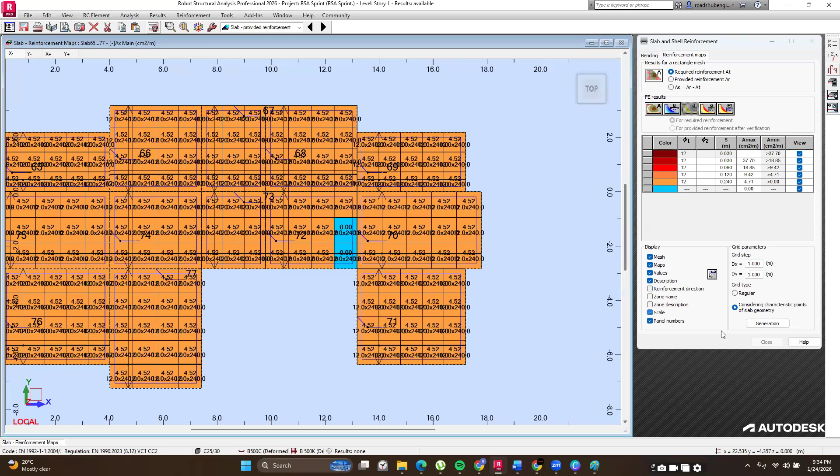Once you do that, just click on calculate here so that the software calculates for you. All right, so you can see the software has calculated that for us. So I want to make this a bit simpler to read. I'll turn off a few things here so that it is easier to see.

Okay, so this is what you have. You can see the bars that you have and how they are spaced. This is the x negative direction - x negative is the bottom bars in the x direction. Then y negative are the bottom bars in the y direction, and x positive are the top bars in the x direction, and y positive are the top bars in the y direction. So there you can see the coordinate system here.

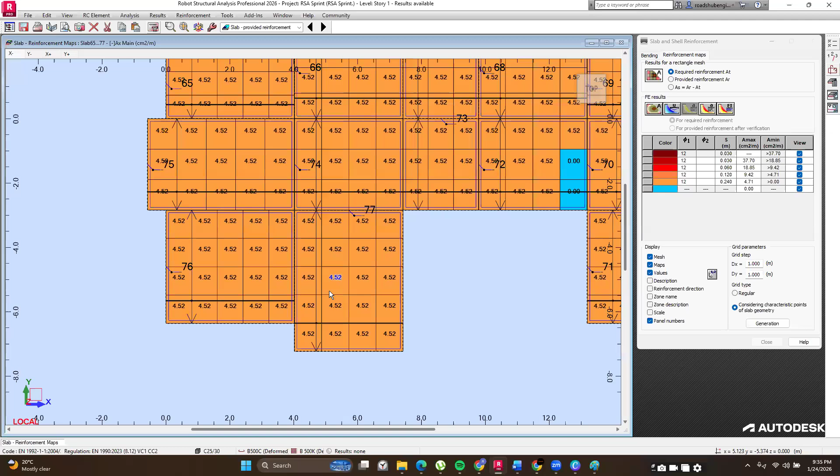So you can just use them. Just know negative is bottom and positive is top. So when you look at a bar, you can tell that this is the bottom bar in this direction, and this one is the bottom bar in this direction. So it is placed in this direction, and then arranged going upwards. You can switch between the other tabs just to see how the others have been arranged. These are basically just the results for the design of slabs.

So if you want to see the rebar, now you can go to RC design here, then select slab reinforcement. It just follows what we did, so what was designed is this one that is ticked. Just click on calculate to show the reinforcement.

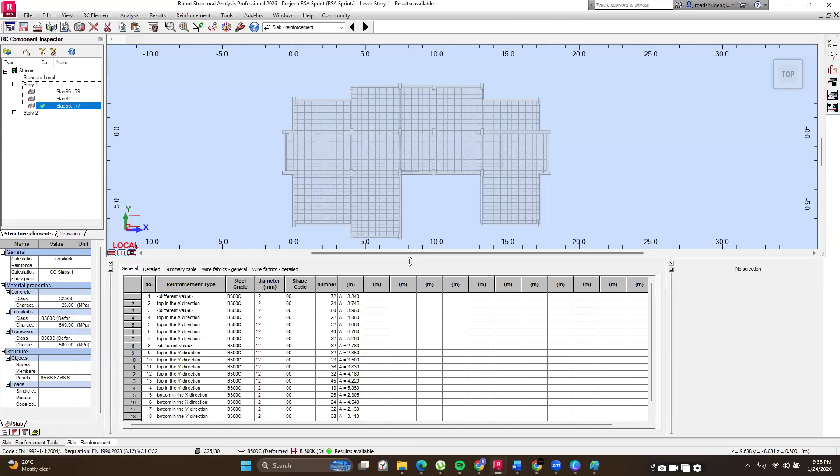Okay, so this is what I like about Robot - it tries to sketch or create a drawing for you on how the rebars should be placed, and this makes your work a bit easier even when you go to detailing. I know I'm rushing a bit, but I hope you understand I have a lot to show you before the session ends. So basically that's how you do them. I hope when you get the recording, you'll be able to go over these at a slower pace, and appreciate the software more.

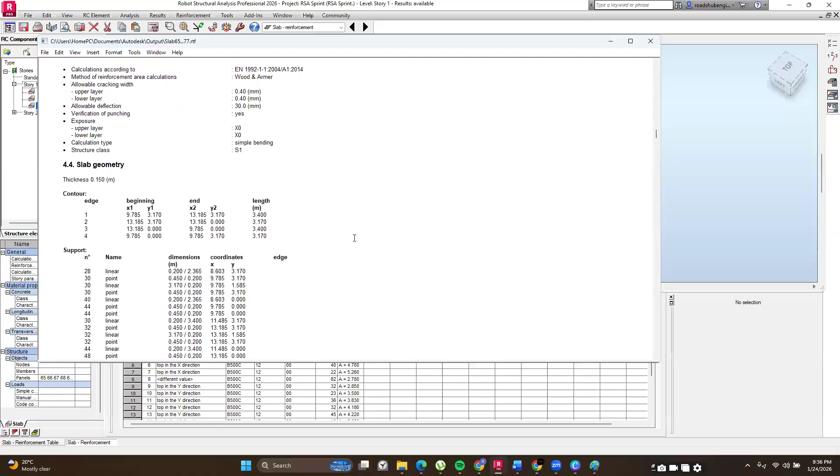So you have your slab there. And if you want to generate the calculation note for the slabs, all you need to do is go to results, then click on calculation note and click on OK. Once you do that, you're going to have your calculation note here. So you can compile this, and if you're taking your design for approval, you can include this in the document they're going to be taken for approval. Okay, so that's how you do the design of slabs.

So I'll go next to the beams. I always recommend you start designing the slabs, then you do your beams, then you do your columns, then you do your foundations. So slabs, then say the staircase, then the beams, then the columns, then the foundation, rather. So I'm going to design one of the beams here.

I'm going to make it as easy as possible, and it's going to follow the same procedure that we used before. So to design it, you just need to select the beams that you want to design. And when you're selecting the beams, something I'd recommend is select them as a continuous beam.

So if you want to design these beams here, say along grid 3, remember they are going to be cast together, and rebars are not going to just enter this column here. They're going to be placed in a continuous manner. There's going to be lapping, and when bars don't need to be cut, don't cut them. So for you to account for that in the software, please ensure, or try as much as possible, to design for them as a continuous beam.

If you select one, Robot will treat them as individual elements. Robot basically does what you tell it to do. So you have that. Select that beam as one continuous beam, then go to design.

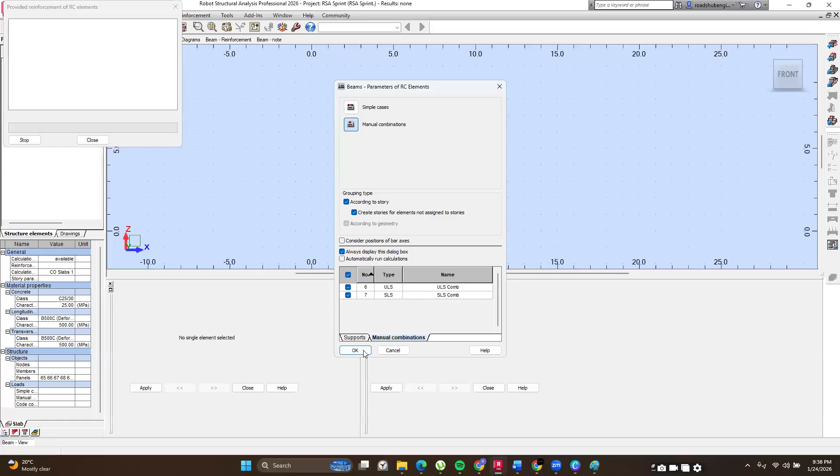What did I do? Let me go back to geometry. Okay, so we go to design, then we go to provided reinforcement of RC elements. And then we'll go with manual combinations and click on OK. Then we have this structure over here.

So once we have this, we can just select the reinforcement patterns that we had before, and then click on calculate. And once you click on calculate, you are going to have your beams designed. I think the design phase is a bit easy compared to the modeling and analysis bit. The important thing is for you to understand what is happening at this stage.

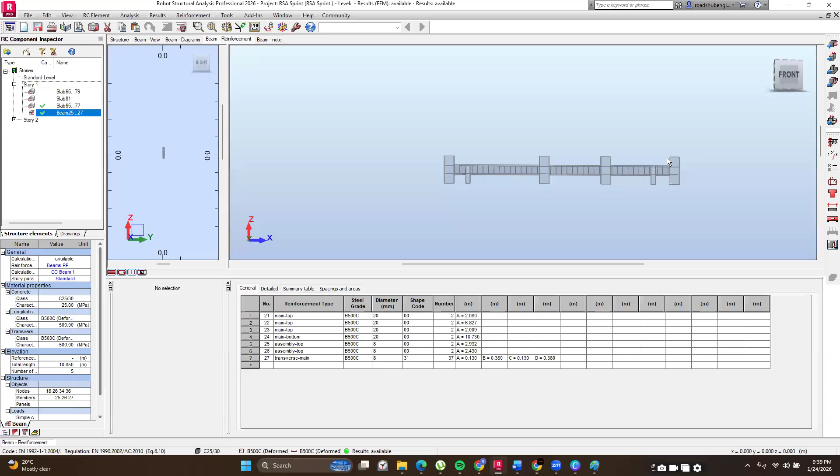But just to give you an overview of what is happening: when you need to design your beams, you need to first understand that you have to set the software. You need to set the story parameters. We did this for the slabs, so I'm just going to use the same story parameters because it is one structure. Then we have the calculation options, and these calculation options are what guide the software on how it is going to design for the individual elements.

So you have your calculation options here: general, then you can tell the software how you want deflections to be corrected. Majorly for deflection, we want to correct it by depth, so we leave this unchecked. And for the minimum cover for the beams, I think class 25 is sufficient enough. So I'm going to leave it as class 25 and ensure that it is calculated to the edge of the transverse reinforcement, or the stirrups.

Then you have concrete here. For concrete, we are working with class 25/30, but I always recommend please design with the class that you're going to be using on site. When it comes to concrete, it's really important you design with the class that you're going to be using on site.

Then we have the longitudinal reinforcement. Under longitudinal reinforcement, you select the bars that are available in your market. So if you are Kenyan, I don't expect you to select, say, 14 millimeter bars or 22, 24 — we do not have those bars in our market. For us, we have 8, 10, 12, 16, 20, 25, 32, and upwards, you need to customize them.

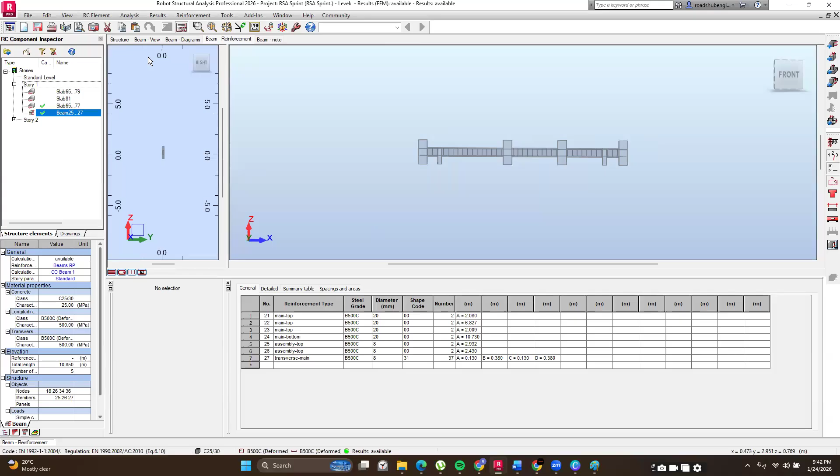So you can see your beam. This is where you see your beam. Then you can see your beam diagrams.

So the first one is the bending moments. What you have in red are the maximum moments or the capacity of your beam, and then yellow is the design moments, and green is the redistributed moments. So the check here is to always ensure that the design moments are always less than the capacity of the structure or of the section.

And then you have your shear force here, so you can see how your shear force is behaving, and you have that.

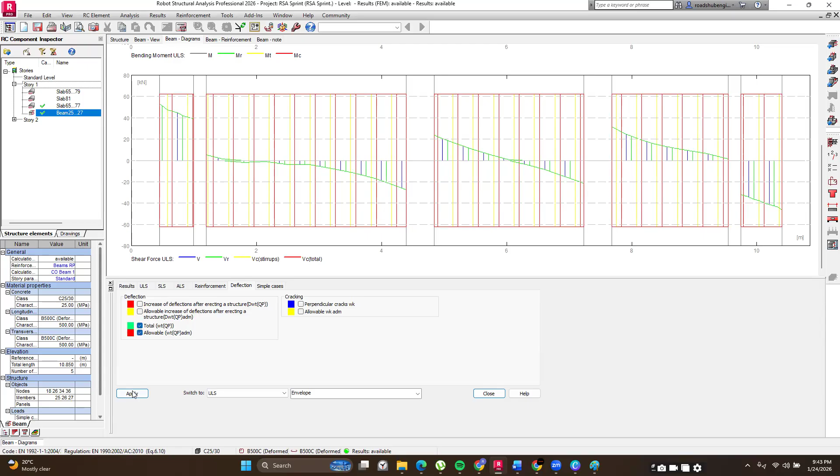If you want to add another diagram, I like to add the one for deflection. So you just go to deflection at the bottom, check total and allowable, and apply. Then you're going to get a deflections diagram, showing your deflections and what is allowable. So you always ensure that your total deflections are less than what is allowable.

Then you have your beam reinforcement. This is your beam reinforcement here, and I like how it is shown in 3D so that it can aid in your design.

And then finally, you have your beam note. Okay, you have your beam results, so you can see the number of bars that you need, how they have been placed, and also you have a simple material survey. So that's how you design beams.

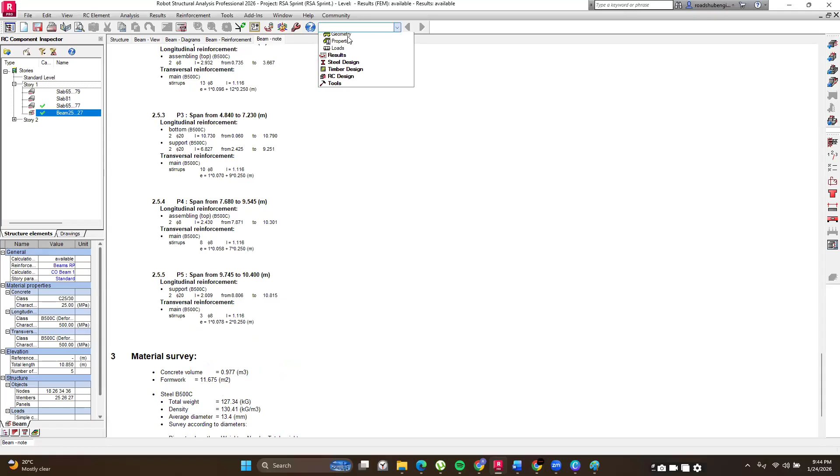It's quite easy to do. So next I will go to the design of columns so that we can finish designing our columns. And when it comes to designing our columns, I'll just give you an overview of how we design columns.

So what I want to do is select all the columns in story one. I'm going to be assuming you want to design columns in story one. We may not need to design for all of them. We can select a few columns that we want to design for.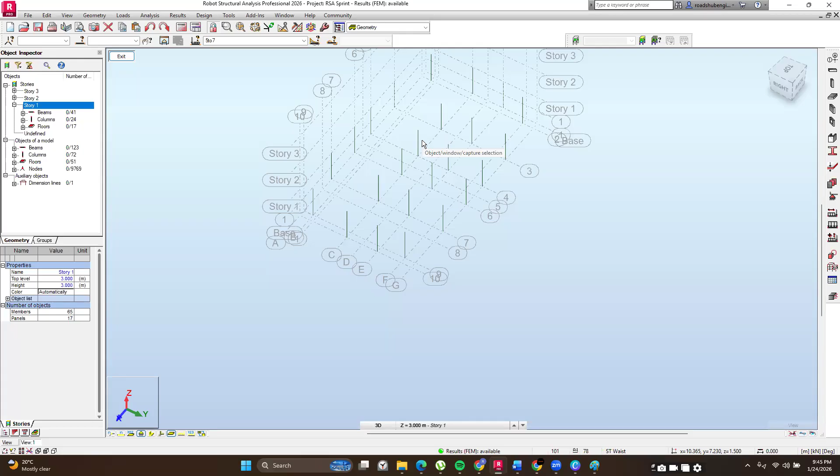So we may say that for these interior columns, we can design for the worst case scenario. Then for those columns that are within the worst case scenario, we assign them that particular section. And since it's the column we consider worst case scenario, if we have a section that passes for that column and rebar, then it means it's going to be safe for the other columns.

So if you want to identify the column that you'd consider your worst case scenario, you just use the tools, the results that we viewed earlier. You just check your fx and your my and get to see which column is experiencing the worst. You can be able to see that.

But you don't have to do this manually. You don't have to read them manually. What I recommend you do is select columns that you expect to behave in the same way.

For example, for these interior columns, you'd expect them to behave in the same way because interior columns are likely to experience more axial loads and less moments, while exterior columns experience majorly more moments and lesser axial loads compared to interior columns. So because I expect these exterior columns to behave in a similar way, I'll just select all of them together. You left click on one of them, then press Control and click on the others.

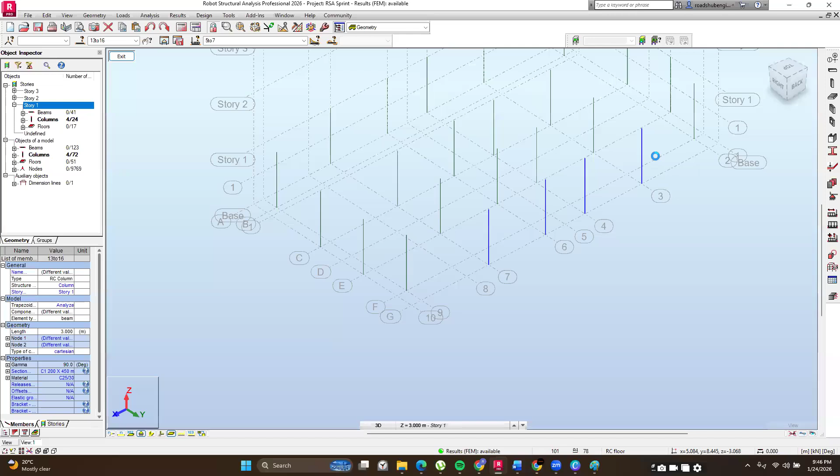Then once you do this, you just go to Design and go to Provided Reinforcement of RC Elements. Give the software a minute and then click OK to go into the design template. With this, you get a column that you're going to be designing for. The design of columns is a bit easy because we have set the reinforcement patterns before. So all we need to do is select them.

Okay, all we need to do is select them and then run the calculation options. So when you use the software once or twice, once you've set everything, it becomes really easy to use. So we set the calculations option for the beams. It's almost basically the same thing, so we are not going to do that, just in the interest of time.

So that you can get to explore other things. When you design your column and it shows this green tick, it means it has passed the design. At this point, you can go through the results and make your own judgment if it's okay for you, or if you want to increase the section, etc. So we have this column. It has passed the design.

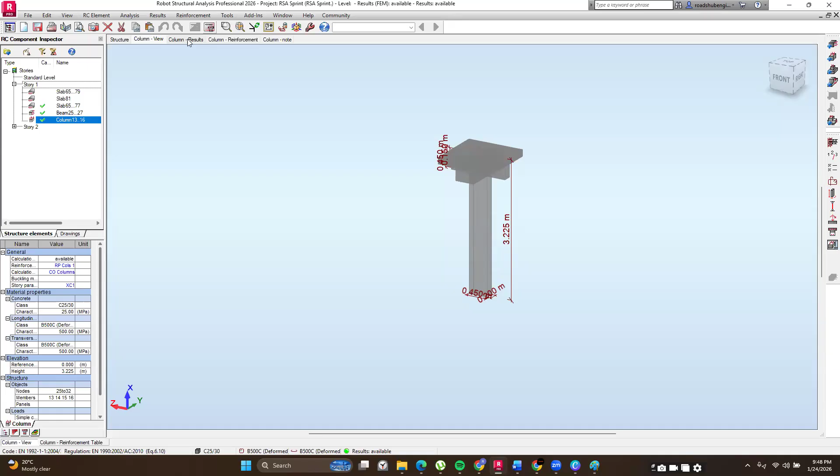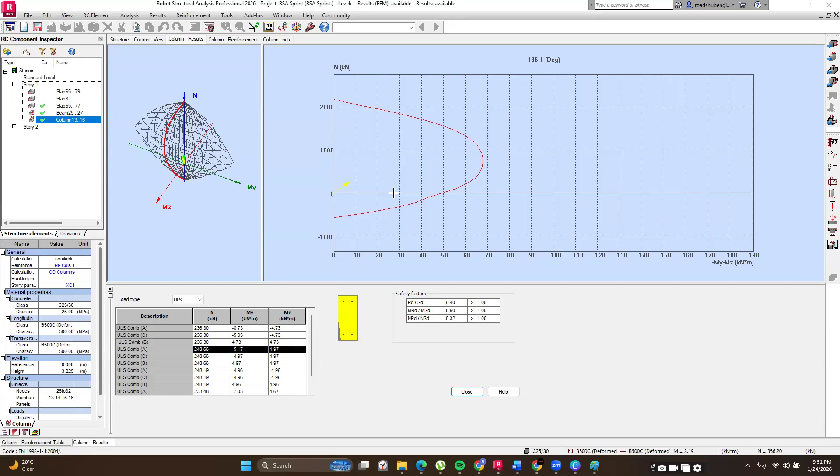So I want to design one footing so that by the end of this training, you're going to have designed, or at least have basic exposure to the design of one element each: a slab, a beam, a column, and a footing. Doing that is relatively easy.

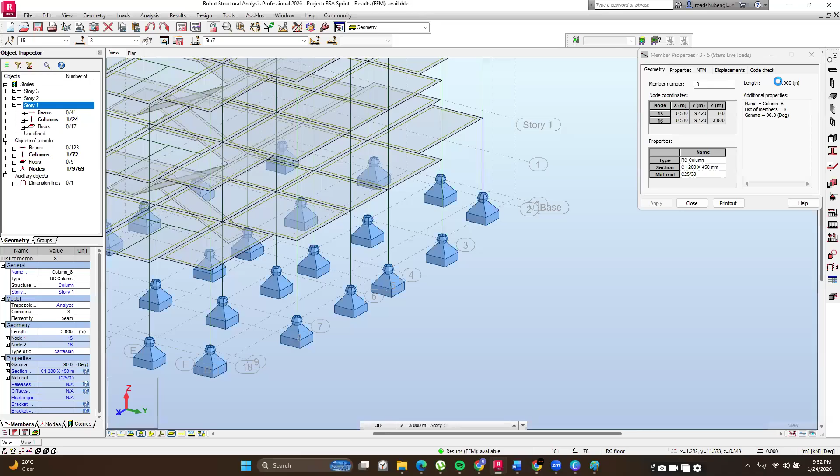So what you do when it comes to the design of footings is basically very simple. You just highlight one of the nodes here. Let me select this node. You just highlight it, and once you highlight it, please note in the object inspector you should only have one node selected. So you select one node in such a manner, and it's going to be highlighted here.

Then once you do that, you're going to go to design, then provided reinforcement of RC elements. The software is smart enough to know that you want to design for a foundation at that particular point. At this point, you can already see that the software has given you a basic outline of how your footing would look like. So I will just go to the options definition here.

So for all elements, when you are using the software for the first time, you are going to have to set the calculation, the story parameters, the calculation options, the reinforcement patterns, and then for the soils, you're also going to set the type of soil and the bearing capacity. This applies if you're using the software for the first time, but as you use it more, these become templates and you do not have to set them again. Because I've been using the software for a while, I do not need to set anything, but just to demonstrate, I'm going to go through them.

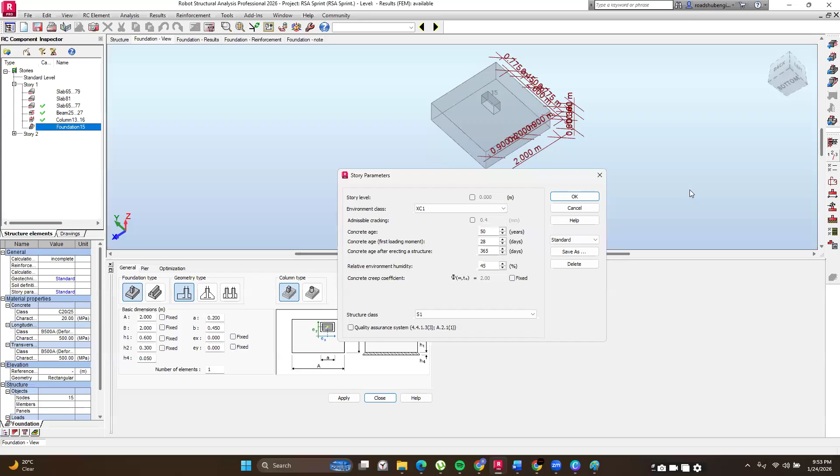So I'm going to go to story parameters. At this point, you have already seen the exposure classes, so I'll just close that. I think we are good with that. So for the story parameters, I will just select one from here.

Then I will go to calculation options. Under calculation options, it is really simple here. Number one, under general, you don't need to make any changes. Then under concrete, you just need to look at the class of concrete being used. So for concrete, we are going to go with class 25/30. It is really important you use the class that you're going to be casting with. So for the footings, I'm going to go with class 25/30 and ensure that is what I have set.

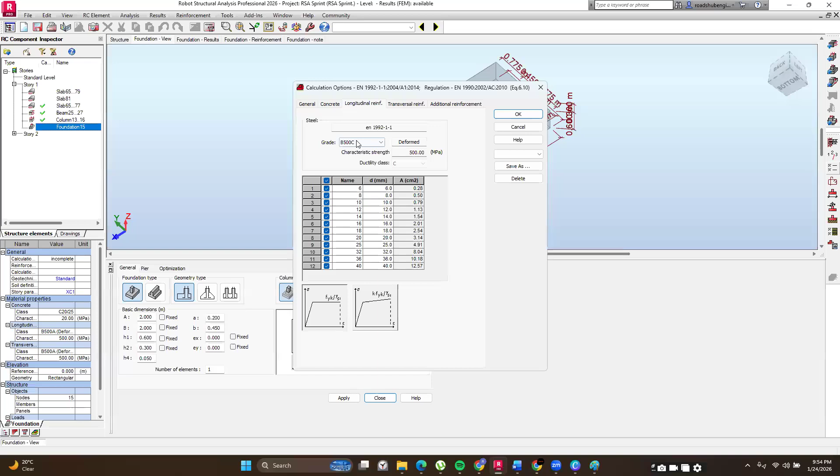Then in the longitudinal reinforcement, I like to go with 500C. Then I will select the bars that I want, so I'll go with 12, 16, and 20. Then in the transverse reinforcement, I will go with the same size of bars. Let me change to 500C. I will go with 12, 16, and 20. Then in the additional reinforcement, I won't have any, so I'll just click on save and have these as a pad foundation calculation options. Then click on OK and OK there.

Then I'll just close that. Then I will go to reinforcement patterns. I don't need to make any changes here, I'll just select the first option. Then in the pier, I will go with the third option. Then in the dowel, I won't make any changes. Then for the shape, I will ensure for the main bars, my hooks are at 90 degrees. You know the type of hook we have, just to cater for the development length, so I'll have them as 90 degrees. Then I will save this as foundation reinforcement pattern 2. Then click on OK and OK.

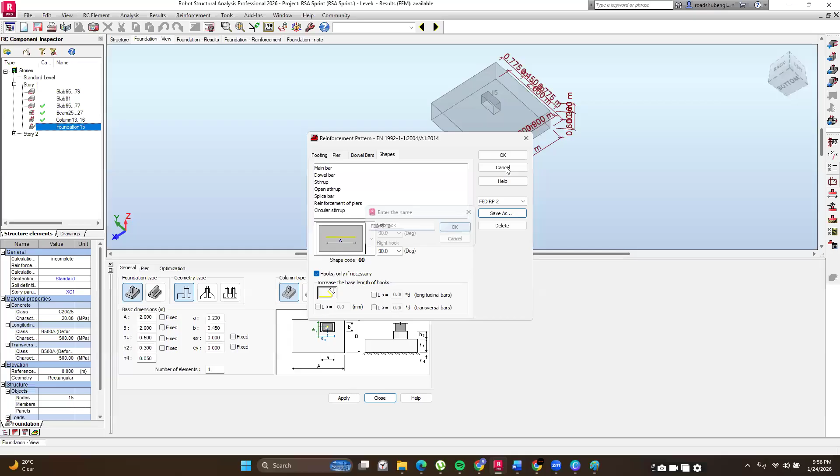Then after that, we have item dimensions. So if you want to enter the dimensions of your footing, you can change them from here. If you want to use a concentric footing or an eccentric footing, or design this type of footing or a combined footing, you can select from here. I'm not going to be selecting the shape, I'm going to allow the software to do that for me. We also have the option to add additional loads. This would come in handy when you are designing the foundation as a separate element, but because we have designed the structure, modeled it, and run the analysis, we have all the loads coming from the structure. So we do not need to define the loads.

Then the next one is the soil definition. At this point, you're just defining the type of soil. You can select the type of soil here, the one you want to use. I'll just stick with what is here, and then I will set the depth of excavation. So I'll just set it to negative 1.5, and then I will click on apply, and you're going to see that it has been applied. Let me change it back to 0.

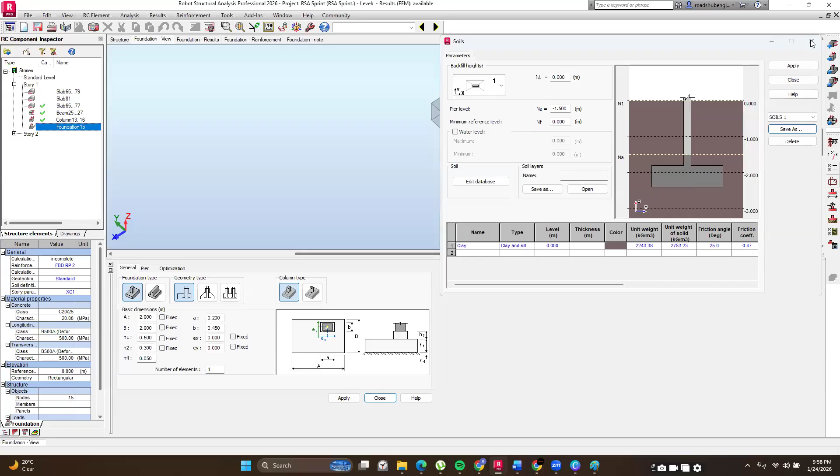Then the next thing is to set the geotechnical options. At this point, we are just going to set the bearing capacity. For ease of design, I'm going to go with a bearing capacity of 250 kilonewtons per meter squared. To set that, this one is in MPa, so I'll just divide that by 1,000, and I will end up with 0.25. So I'll just type 0.25 here as my MPa and save it as a geotechnical option.

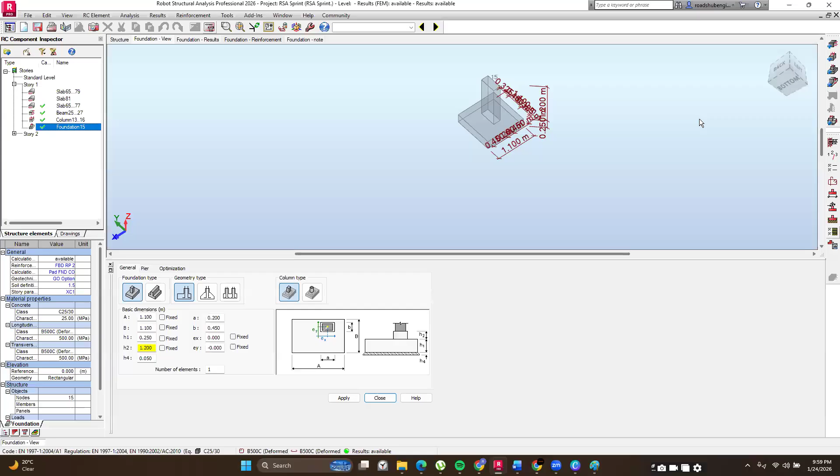You can go through the results. You can see that the pressure acting on the soil is less than 0.25 on all corners of the footing. So you have 0.242 here, 0.229, 0.227, and 0.214. Then you have foundation reinforcement.

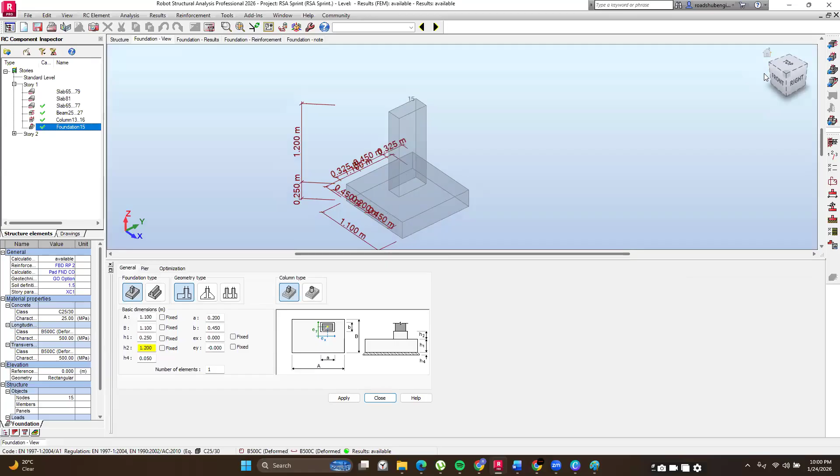You can view it there, and you can also view the stub column details from here. You can look at the bars required, and also in the foundations view you can see the dimensions of the footing required. So the software is telling you that you need a dimension of 1.1 by 1.1 by a depth of 0.25.

Then to have your calculation note, I really like this one. It is quite detailed, so you can see your calculation note here and follow through it. The beauty of these calculation notes is that they have been referenced to the Eurocode at every point, so it is easy for you to follow through. Basically, that's how you get to design all elements within the software.

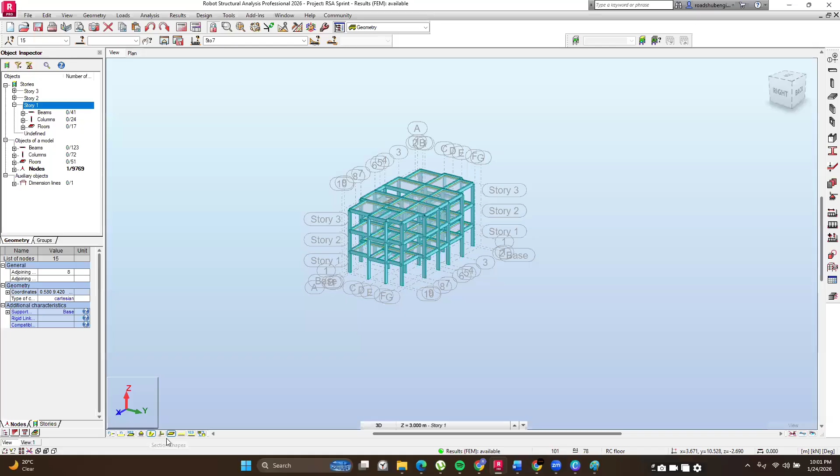Then I'll go back to geometry and just do this. Okay, so this is what I like. When you are here, you're going to notice that if you want to see your footing, you can see them from this view, so that if they are overlapping, you can be able to sort them out even before you go to detailing. Basically, that's how you use Robot, and that's how easy it is to work with.

So that's all we had for you for the Robot sprint. I hope you got to appreciate how the software is used, and at least you've gone through the whole workflow, from working with architectural models to modeling in the software, to running the analysis, to designing, to viewing the calculation notes.